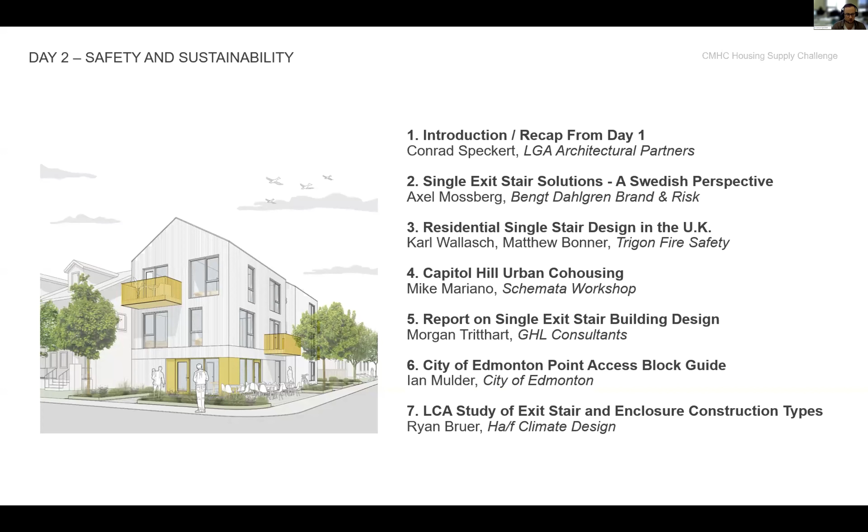We'll then turn to the Canadian context and hear from GHL consultants who have been working on a very detailed technical report on single-stair building design recommendations. We'll hear from Ian Mulder at the City of Edmonton, who will present the point access block guide that the city have developed. And lastly, we'll hear from Ryan Bruer of Ha/f Climate Design, which will touch on some key considerations in terms of embodied carbon and construction type for exit stairs.

Just to quickly recap for anyone who wasn't around yesterday, you heard from LGA and 3 other architects as we presented pilot projects and prototypes for single-stair housing across Canada. We looked at the cost benefit of single-stair design with 6 prototypes for infill housing, in terms of floor area efficiency, construction cost, net operating income, and residual land value.

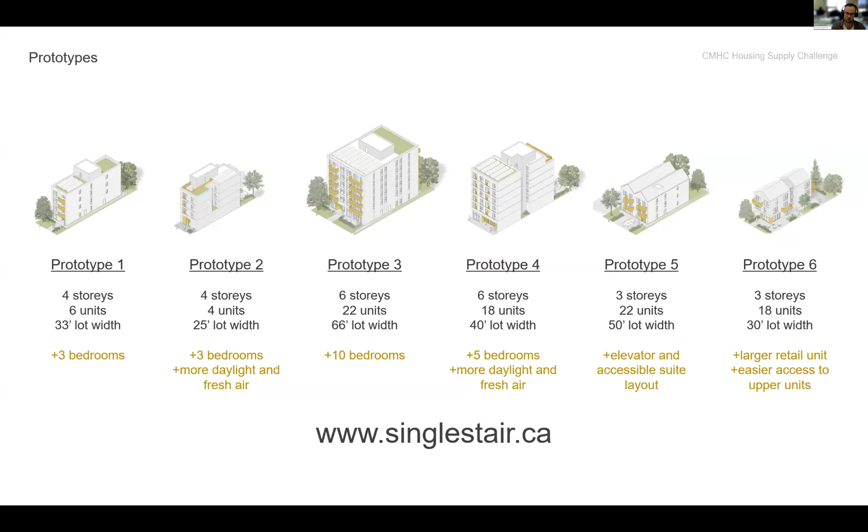There's been a lot of changes recently to zoning regulations and planning policy across Canada to allow for more housing in existing neighborhoods, really as an alternative to suburban sprawl. However, this type of what we might call gentle density, buildings like multiplexes of up to 4 units or small apartment buildings of up to 6 stories, are challenging to build on small lots.

The goal of single-stair design is really threefold. Firstly, it is to make these missing middle and small mid-rise housing types easier to build. Second, to make the development of smaller sites more viable. And that really leads to third, which is to enable small scale, what we might call citizen developers, types of organizations without the large amounts of capital required for land assembly or to acquire larger properties.

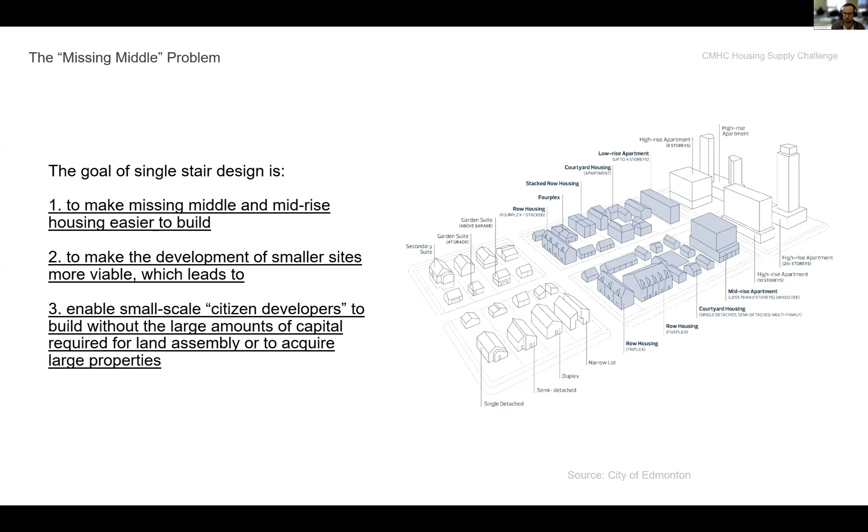Just to quickly talk about the prescriptive code, the National Building Code under Section 3421 and 998 says that any floor area in a building of not more than 2 stories in height is permitted to be served by one exit, with a total occupant load served of not more than 60. In other words, any multi-unit residential building, except for a stacked townhouse, of more than 2 stories is required to have 2 separate exits.

This diagram shows the maximum height for single-stair multi-unit residential buildings in jurisdictions around the world. As we work our way down the drawing, you'll see a clustering of countries around the 6 to 8 story height range, which corresponds to the height at which additional high-rise measures are required in the Canadian context.

LGA and David Hine Engineering submitted 2 code change requests to the National Building Code to allow single egress for buildings of up to 3 and 6 stories in height. It is our understanding that this is at least a priority topic for the 2025 to 2030 code cycle.

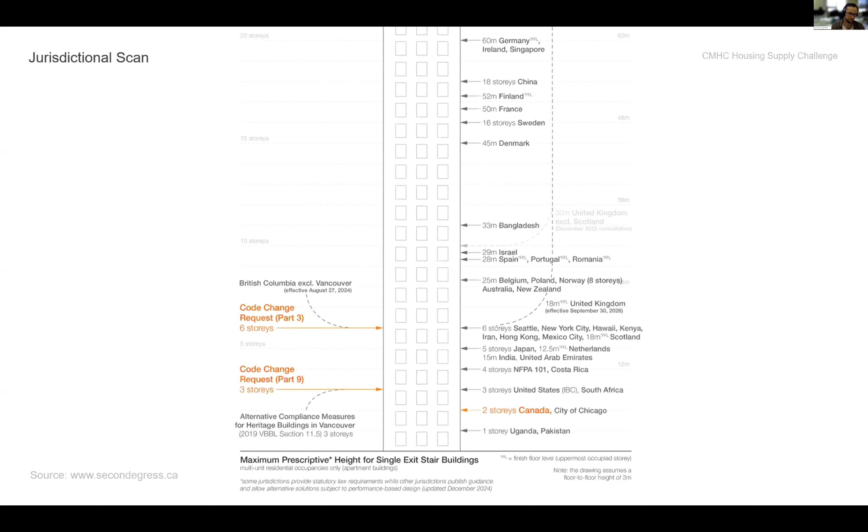Since the first edition of the National Building Code of Canada was written in 1941, the NBC has contained the prescriptive model code requirements for the design of buildings in Canada. In 2005, the NBC was transitioned to what we call an objective-based code, which introduced objectives and functional statements to clarify the goals of the NBC's prescriptive requirements and what they're intended to achieve.

This is one option of code compliance, since acceptable solutions by default meet the intended objectives of the code. The other option is the use of alternative solutions, which must achieve at least the same level of performance related to the objectives assigned to the associated provisions.

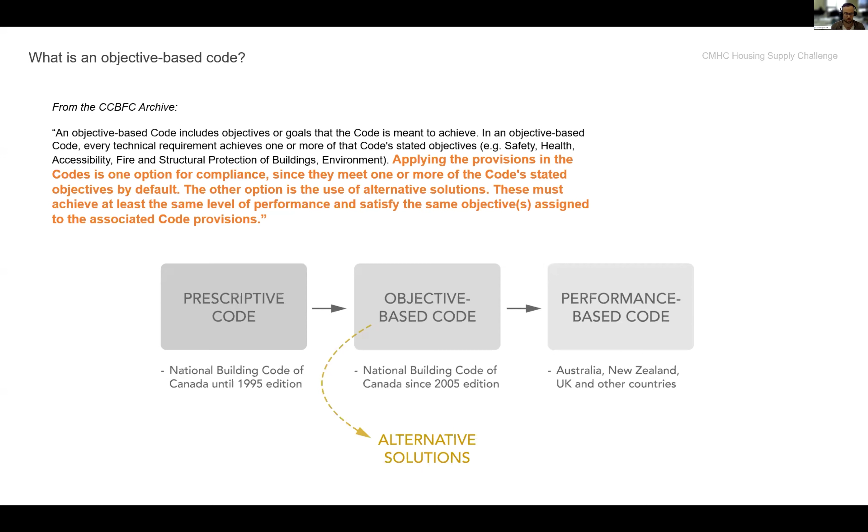I'll just note as well that single stair in Canada is not a new idea. In 1984, 2 architects wrote a research report for CMHC to document the differences in apartment building layout in terms of fire safety. In the 1990s, a very well-known architect wrote 2 papers on the challenge in building Main Street's housing.

Particularly in terms of the 2 exit stair requirement and parking requirements. Then in 1995, the former assistant director of the Ontario Building Code had written a study proposing single stair changes to the Ontario Building Code. So today, 40 years later, this technical issue is receiving a lot more attention given recent planning policy reforms.

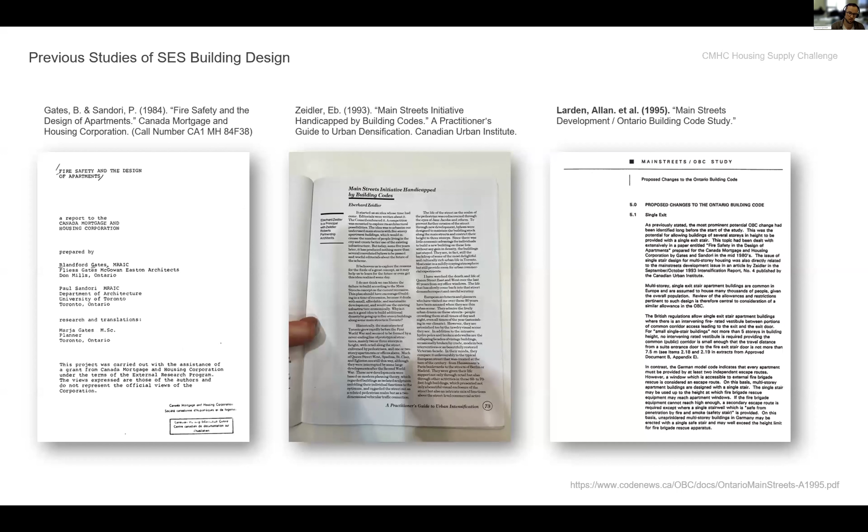The United States revised their limit on single stair about 20 years ago in recognition particularly of sprinkler system performance and reliability. So it is in many ways long overdue to discuss alternative solutions to address this issue in Canada.

Last year, the NFPA, the National Fire Protection Association, also held a symposium to discuss single exit stair and to hear from stakeholders, particularly in fire services across North America. The report included a comparison of fire statistics between building types.

According to the NFPA data, single detached houses are statistically the most dangerous type of housing, with a death rate of 25 persons per million. On the other hand, apartment buildings of 3 to 6 stories have a death rate that is 80% lower.

I mention this because many parts of the building code make it very easy to build houses, while adding many costs and complexities to the construction of small apartment buildings. Now, as Canadian cities look to change land use policies and zoning bylaws, we will inherently increase the fire safety of Canadians by providing more housing options that are in sprinklered and fire alarm buildings.

We will also be decreasing our per capita carbon emissions by eliminating further suburban sprawl and urban boundary expansion. And with that, I'm going to turn it over to Axel Mossberg to talk a bit about a Swedish perspective.

Right, let's see if I can share my screen. Let's go. There we go. There we go. Hello, everyone.

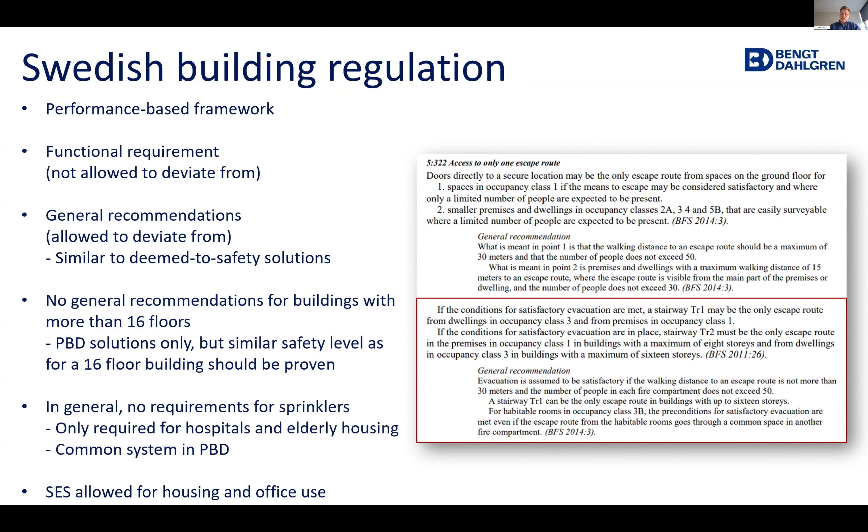So I'm just going to flip through some standard cases here in Sweden. This is a 2 to 3 story building. Here you're allowed to have one exit, and it doesn't have to be fire compartmentized. This is just a regular house, pretty much, or houses built together, and you're allowed to jump from your window up to 5 meters above the ground. So it's a self-evacuation strategy, pretty much, so the rescue service are not intended to be part of the evacuation strategy here.

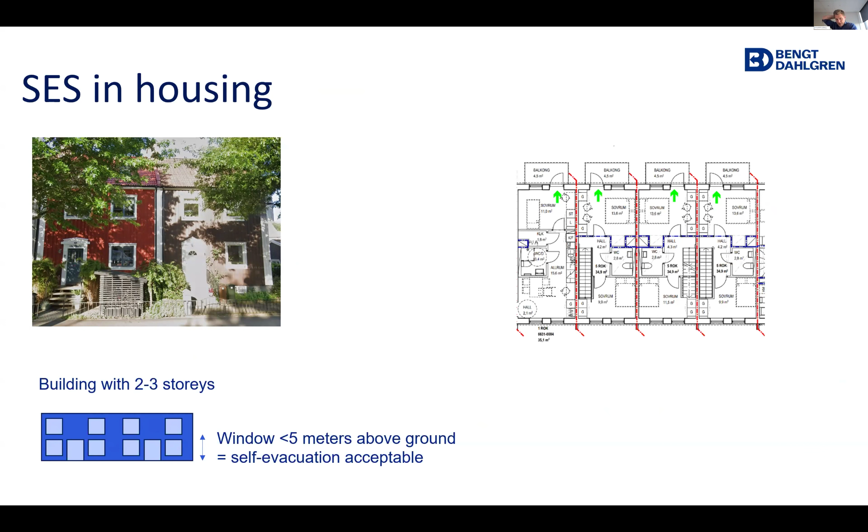If you go above that, with a building up to 16 stories, which this is also an apartment building, you are allowed to have a single exit stair if you do it as a TR2 stair, as we call it in Sweden, or TR2 trappa in Swedish. The difference between a regular stair and a TR2 stair is that you have a smoke vestibule in between, so here there's a fire compartment between the apartments and the stair.

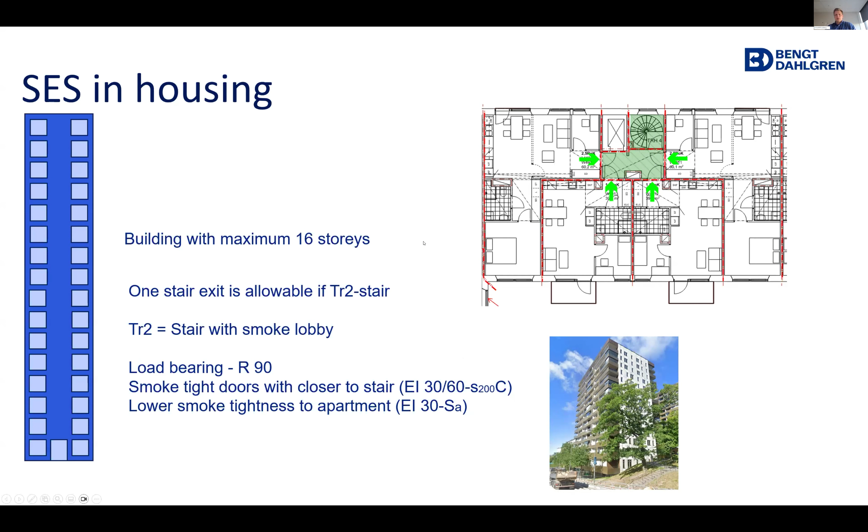For buildings above 16 stories, as I mentioned, we do not have a general recommendation, it's performance-based design. But based on experience, I can tell you we have a lot of 16-plus story apartment buildings with one single exit stair. You then have to have a TR1 stair, or TR1-trappa as we say in Swedish. The TR1 stair is pretty much a smoke lobby with a pressurization system of the stairwell.

So you pressurize the stair and remove the exhaust air, pretty much, often using the elevator shaft. You have to use performance-based design, as I mentioned. Just talking from experience, this will be different for each project, but for up to around 20 to 22 floors, it's very common to do this without sprinklers. The performance-based design will then compare the different stair solutions, pretty much. And when you go above about 22 floors, you generally put in sprinklers to make the risk analysis come together, pretty much.

It's the same load bearing requirement. You still have the smoke tightness requirement on the doors to the stair. It has to be a closer to the stair. It's also closers on the doors towards the smoke lobby, but in this case there's no closer on the doors towards the separate smoke vestibules here.

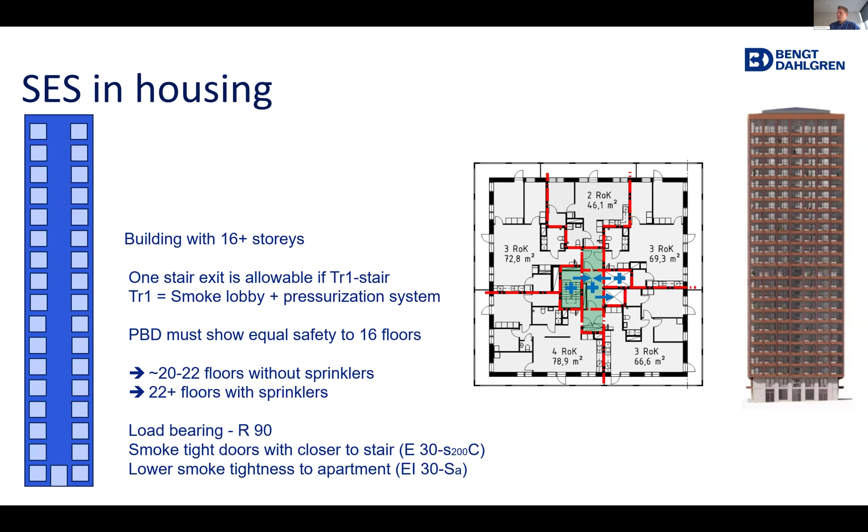Requirements. Also, I thought I'd give you a few examples. I've mostly been talking about apartment buildings, and we have Sweden's second largest or tallest building, an apartment building called Turning Torso. It was built in 2005.

And it was just passed by Karlatornet here in Gothenburg last year in tallness. It's 52 stories, 190 meters high. It's a residential building, it has sprinklers and stuff. It's a performance-based design, but it's also a single stair building.

And then I'll give you this as another example on the right. It's Kista Science Tower, an office building in Sweden, which is 32 stories and 124 meters high. It's an office building, also a single stair building, also performed with performance-based design.

But it's similar, just to give an example on office buildings as well. I currently have a few projects ranging from 20 to 27 floors with mixed different types, some residential projects and some office projects, with these single exit stair solution buildings.

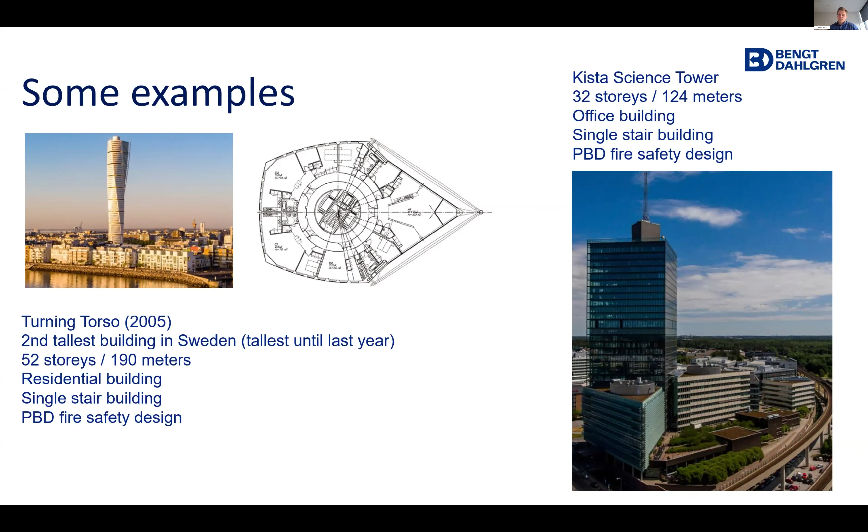So, also just a finishing note here is that the Swedish requirements for fire compartmentation is in general EI60, a 60 minutes standard fire resistance. Also, it should be noted that the facade requirement is that they should be non-combustible, at least for buildings with 3 or more floors.

Or pass a national test called SP Fire 105, which is a full-scale fire test, as you can see in a picture of it here. You build pretty much 3 stories of your facade, and then you can't have a fire spread above the second window, pretty much, or below the second window.

Generally, it should be noted also that we have quite a high level of quality in buildings, I would say, just looking when I've been around internationally, especially when we're talking about tightness of buildings. In Sweden, it's a cold country. I guess Canada is the same, but we are quite good at tightness in our buildings, pretty much.

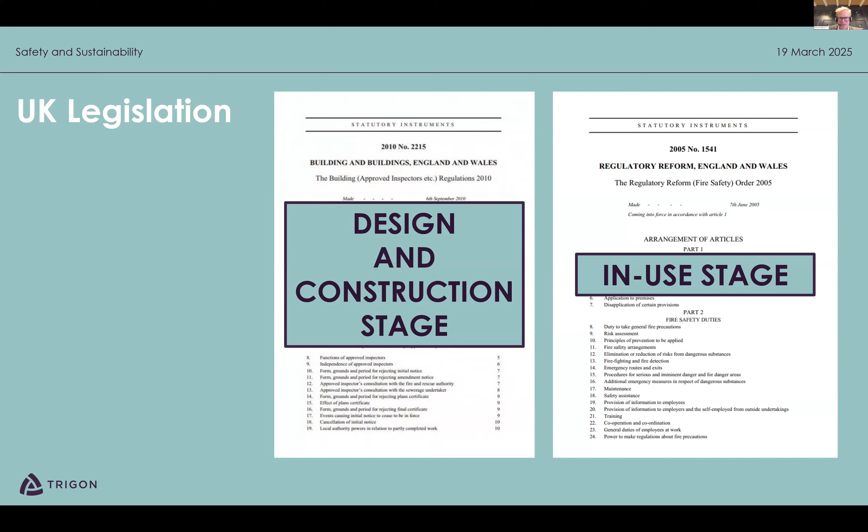And when you're a fire safety engineer, similar to other countries, there are a few areas you need to consider, and the building regulations are telling us to focus on. Focus is generally on life safety, and we do have to consider the means of escape.

How do we get people out, but also how do we get fire brigade safely in? Then we need to consider the materials to prevent internal fire spread, structural resistance, but also external fire spread, and access and facilities for the fire service.

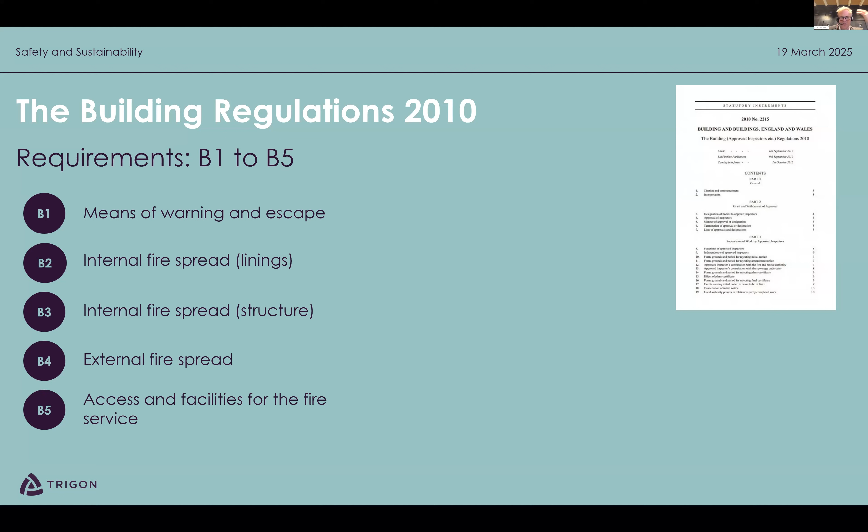What's now so special about these building regulations? Well, similar to Sweden, they are functional in nature. So what does this mean? The building regulations won't tell any designer how many stairs a building needs, or how many exits, or how wide stairs need to be, etc. But they give us a functional performance that is expected the building will achieve.

Because we're talking about single stairs today, I brought you just a text from a means of escape. As a designer, you have to design and construct this building with appropriate provision to achieve an appropriate means of escape, allowing people to leave the building to a place of safety. Appropriate. Wow. What does this mean? Can you imagine I would tell an architect, just design it appropriately. You don't need me.

Well, that's not really helpful. Our regulator knows this. So whilst we have to comply with the building regulations, there's no nice to comply with them or not. No, you must comply with them. You must comply with the functional requirements. The regulator has given us different compliance routes, different guidance documents that we can apply, deemed to satisfy, I think, were the words that Axel used.

The most standard route to achieve compliance with the building regulations is considered to be the approved document B. B, because it deals with fire safety. There are other approved documents that deal with other things designers have to consider. Today, we just focus on approved document B. And it's a standard document. We'll talk about this in a bit more detail.

When I started in 2006 for single stair residential, well, there was no limit. It was just giving us guidance how to design a single stair building, but it was not restricting the height.

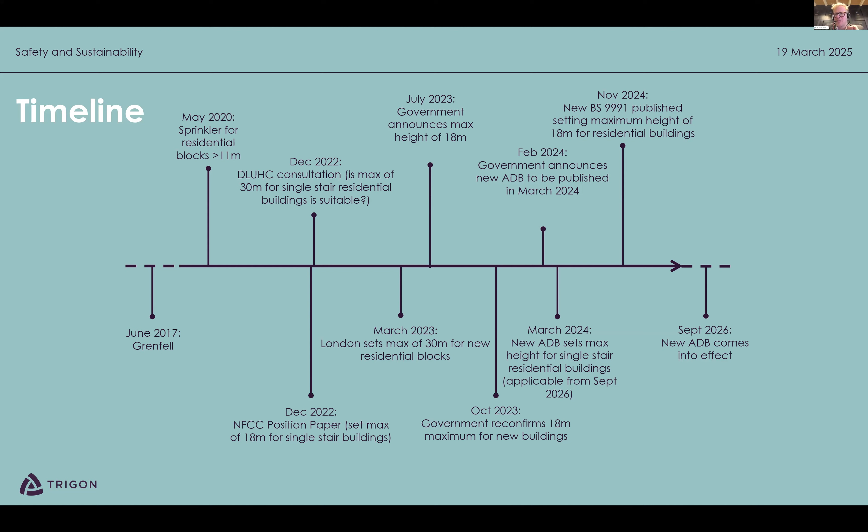So where does this leave us in the industry? I mentioned Approved Document B already. Currently, we could still design single-stair buildings without any height restriction because it only comes into effect in about a year's time. We already have built single-stair residential blocks of flats, not just over 50 or 100 meters, but over 200 meters. I think one of the tallest is 240 meters.

But of course, we know ADB is changing. The appetite is changing, and no one, as I'm aware, is building single-stair buildings at the moment. What will they look like in the future? Single-stair residential buildings will be up to 18 meters height.

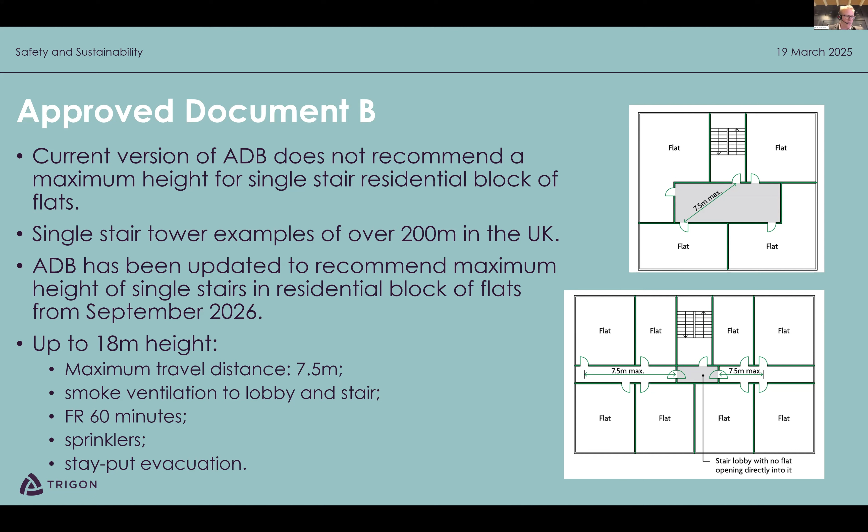You can see in these diagrams they restrict travel distance to 7.5 meters in a single direction. They expect the stair to be ventilated, the lobby in front of the stair to be ventilated, general compartmentation of 60 minutes between flats, and sprinklers throughout if you're over 11 meters. They are based on a stay-put policy, which means only those in the flat where the fire occurs will be asked to evacuate. That's ADB.

Now let's look at the second route, the risk-based approach, BS 9991. There was a version from 2015, and suddenly in November 2024 it was updated, and everybody was surprised, or not, but it did restrict, with immediate effect from the end of November 2024, the use of single-stair buildings in residential use over 18 meters. So there's the recommendation to have two stairs for taller buildings, but up to 18 meters you can still build with a single stair.

Similar to the thinking in ADB, we're looking at travel distance and dead ends of 7.5 meters. If you have sprinklers, you can double this up to 15, so a bit more flexibility. It looks at ventilation of the corridors and ventilation to the lobby in front of the stair. It's based on sprinklers and stay-put. It also talks much more in detail about evacuation lifts, because it's a huge discussion in the UK how we evacuate mobility-impaired persons.

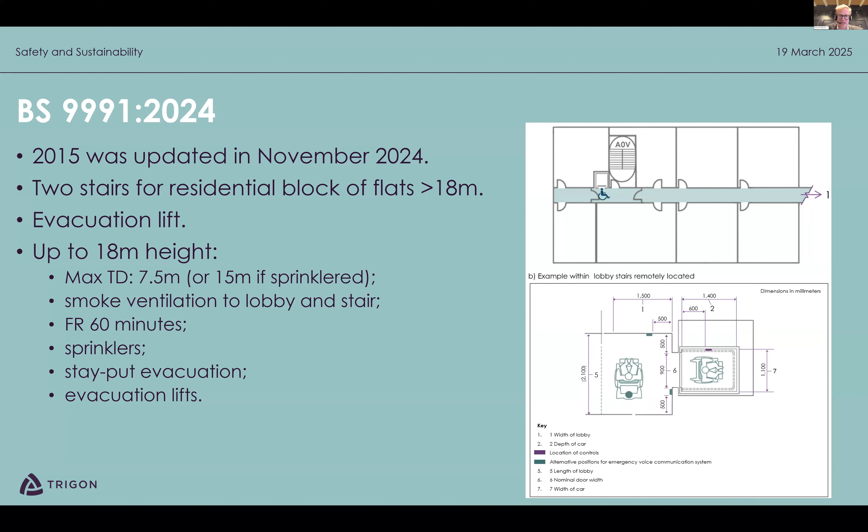I'll emphasize a bit on smoke ventilation, because we think in three different ventilation systems. The stair needs ventilation, often a vent on top that opens and provides a way for natural air in. The lobby in front of the stair needs pretty much the same ventilation as the stair, a natural shaft. Then the corridors, which have direct access to the flat and where we expect smoke in the first instance spreading from the flat into the corridor, should either have natural ventilation, or for taller buildings mechanical ventilation, or a pressurization system, as we've also seen in the Swedish slides, where you create a positive pressure to prevent smoke spread into certain areas.

A key area of these single-stair buildings has always been the ground floor: how do we get people really out from the stair, ideally directly to the outside, without letting them pass again through corridors, flats, or other risk areas?

So we come to the summary. Here in the UK, we have 12,500 residential buildings that we call higher risk because they're over 18 meters. They've been built since the 60s. We have them, and we know quite a lot have a single stair, and some are over 200 meters.

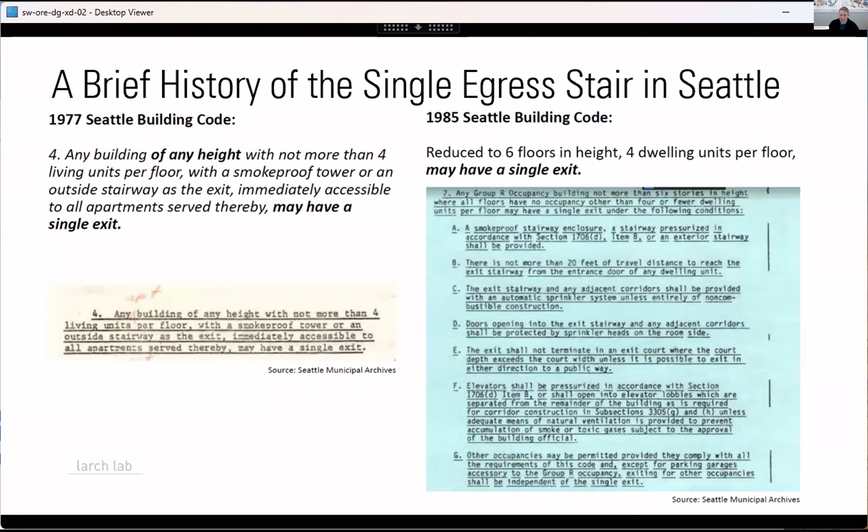A brief history of the single egress stair in Seattle. In 1977, a building of any height, with not more than 4 units per floor, could have a single means of egress, a single stair. In '85, it was reduced from any height to 6 floors in height, still no more than 4 dwelling units per floor. Current code allows up to 6 stories of residential R2 occupancy, no more than 4 dwelling units per floor. We had some state legislation that came before our local agency last week and was passed, and will be enforced at the state level, available to everyone at the state level as of July 2026.

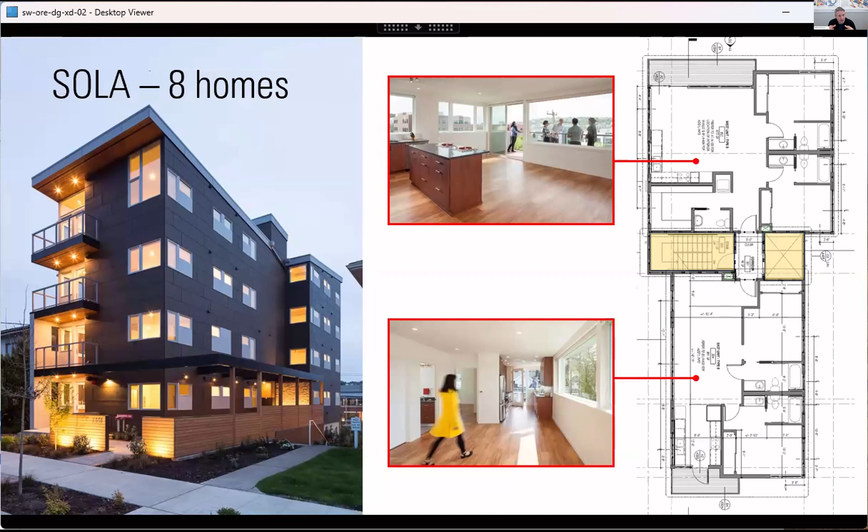Our office has done a few single means of egress stairs, including this one, Sola, which has 8 homes. The image on the right, the floor plan, shows the single stair, with the elevator opening onto it. This is for a developer that really wanted a high efficiency factor for each of the floor plans, so there's no community area associated with that. It meets the intent of the code really at a bare minimum.

So what I'm going to talk about for the remainder of my few minutes is a project we call Capitol Hill Urban Co-housing, approximately located where the red circle is on this image. You can see the Seattle skyline in the distance; we're walking distance to the city center. The Capitol Hill neighborhood was in the news internationally a few years ago for the Capitol Hill Occupied Protest Zone, which is essentially just to the left of the red circle. This is ground zero for protests occurring in the East Precinct, just on the left of the image. We have a light rail station just to the right of the park in the image as well.

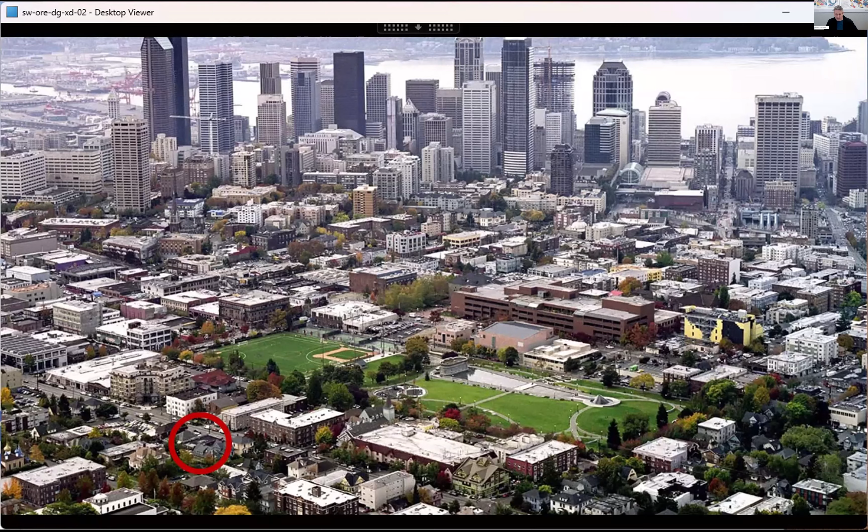An aerial view of our project. This is essentially a 5-story building. We are similar to the one on the left—actually we're the yellow and light gray one on the right. The one on the left was built a couple years prior to ours under the exact same zoning restrictions for height and setbacks off the power lines, with a similar tight construction cost budget that we're trying to hit. So they ended up looking kind of similar, but there's actually 32 units in the building on the left, 4 stair towers, no elevator, and up to 4 units per floor.

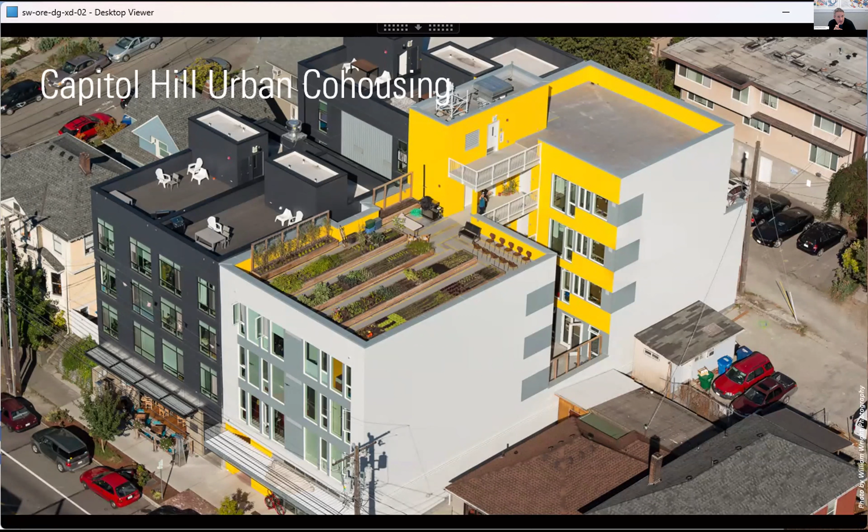Our building, the one on the right, is 9 homes surrounding a courtyard space, with a single egress stair and elevator.

You can see the damper at the top of the elevator hoistway. We actually saved some money by not taking the elevator all the way up to this upper roof level, but there is a smoke and fire damper for a naturally ventilated elevator hoistway there.

There is a stair pressurization fan just on the upper right here that pressurizes the stairs. Each of those egress balconies provides access to anywhere from 1 to 3 units per floor, no greater than a 6-meter distance from the front door to that doorway.

Beyond the building, the single egress stair in our case allowed us to do an economical building that we could get 9 families together and develop on our own.

This idea of co-housing is something that originated in Denmark and was brought to the US somewhat recently, a few decades ago. This idea of kind of living in a community, intentionally knowing your neighbors. We actually got this group together before we had a building.

There's a deep focus on community and privacy, the ability to live together but have your own home, so you can walk out your door and find a community and activity, but being able to retreat to your home as you would anywhere else. I call it a very comprehensive approach to resilience, the idea of knowing your neighbors, and those are the most resilient communities that we can build.

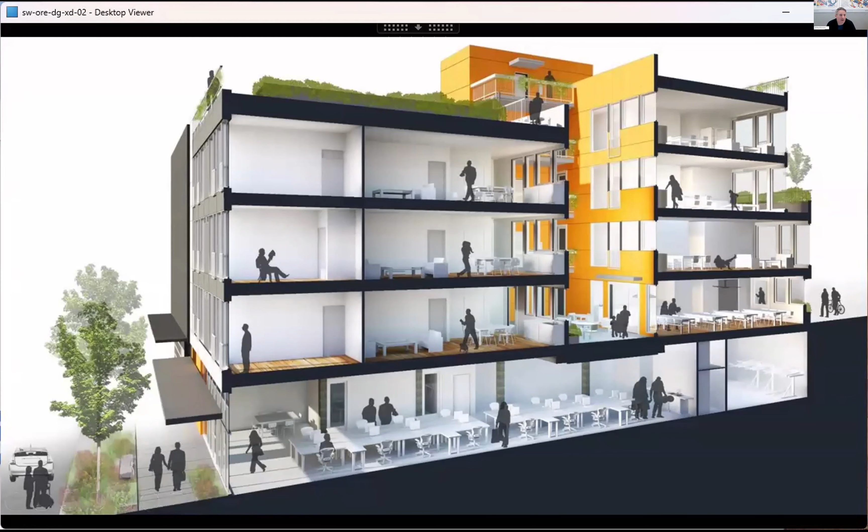That single egress stair and the elevator and those balconies open to a very compact courtyard space that's about 5.5 meters by 6 meters in distance. The balconies add a little more space to that, but it's essentially what we call kind of the heart and soul of the community.

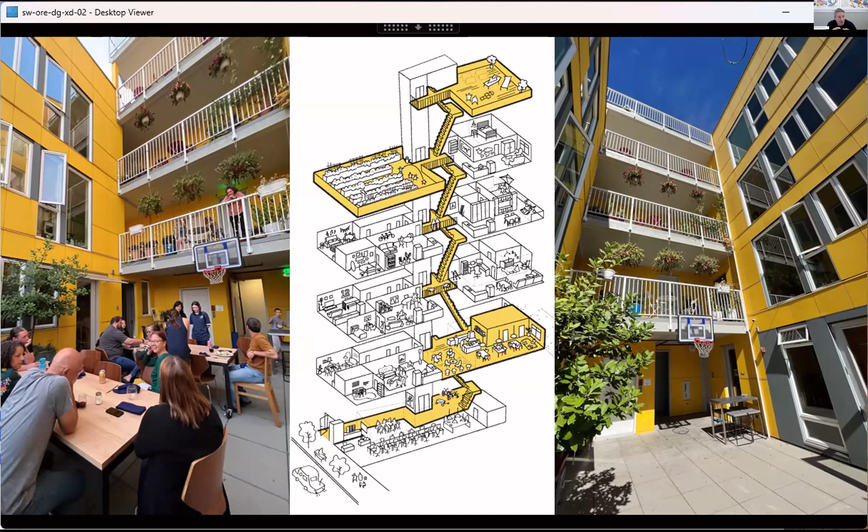All the homes are whatever you can think of might be a home, but it's that common area, that circulation space, in the diagram in the middle, we've drawn in yellow. So it's that common area that connects us all together socially, activities that take place around that courtyard space and that single egress stair.

Typical floor plan here, 2 units on the left. In yellow is the elevator and the stair and that egress balcony. Again, no more than 6 meters of distance from one of the unit entry doors to the stairwell door. Doors are rated, on closers. The stair is pressurized. The balcony is open.

We used a planning approach that we came across in Denmark too, that essentially created kind of semi-public areas of the home at that front door and kind of going deeper into the building for more private areas.

An example of one of those homes, looking east away from that courtyard space and out to the private balcony in the home, looking the other direction towards that courtyard space.

For those who have seen the TED Talk that my partner gave on living in community, this is one of the still images from that. Spencer is actually in his window, about a 6 meter distance from where I stand. The image on the right shows our front door and those egress balconies, the elevator, and the stairs are right over there as well.

One of the advantages of that open space, I can open my front door and periodically come across activity occurring out in that space. Rather than a double loaded corridor and multiple stairs serving a distributed social function throughout the building, we've concentrated all of this activity into a fairly dense little space that allows access to that stair and the elevator and overlooking that courtyard space.

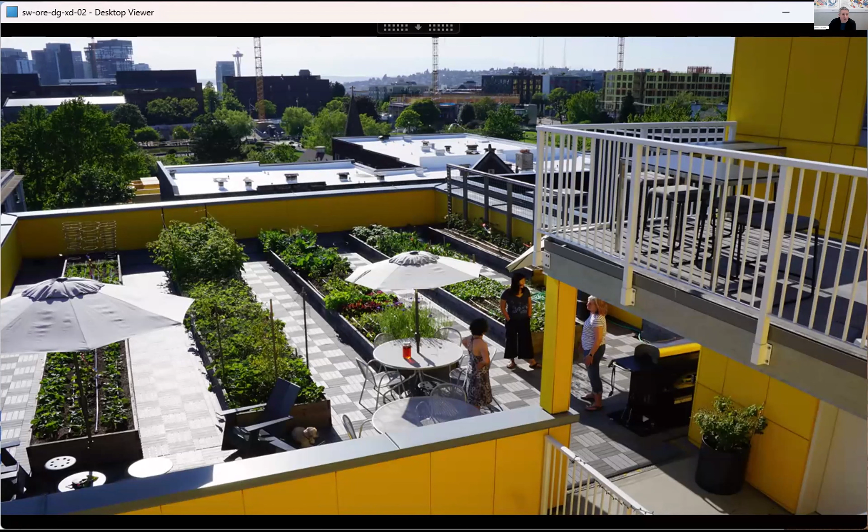The courtyard is in the foreground. The elevator is off to the right here. Those egress balconies you can see. We've got a rooftop farm up there that looks out to the west. The occupant load up here was designed to be about 10, so the beds actually consume a fair amount of that space specifically to keep the occupant load down.

Looking down into that courtyard, throughout the year there's a tremendous amount of activity that takes place. That concentration is allowed by having that single egress stair and the concentration of activity in the community. My partner and I are constantly taking photos down because it's just an interesting reminder of the liveliness of community and living intentionally there.

Something that came up yesterday in conversation was the ability to provide bike maintenance rooms in the building. The middle image here is me rationalizing the investment I've made in a lot of bicycle tools and maintenance equipment, offering a twice-a-year bike tune-up day for the community. Again, this multi-purpose space at the heart and soul of the community serves a variety of functions - celebrations, watching the weather - kind of between and outside the homes.

So that's an overview of what a compact building developed intentionally for community can look like. It's just one example. We had a tight construction budget and a lot of constraints we were dealing with, but we're excited about the outcome. Thank you again to Conrad and everyone who put on this conversation today, and I'm looking forward to questions. I'm going to hand it off to Morgan next.

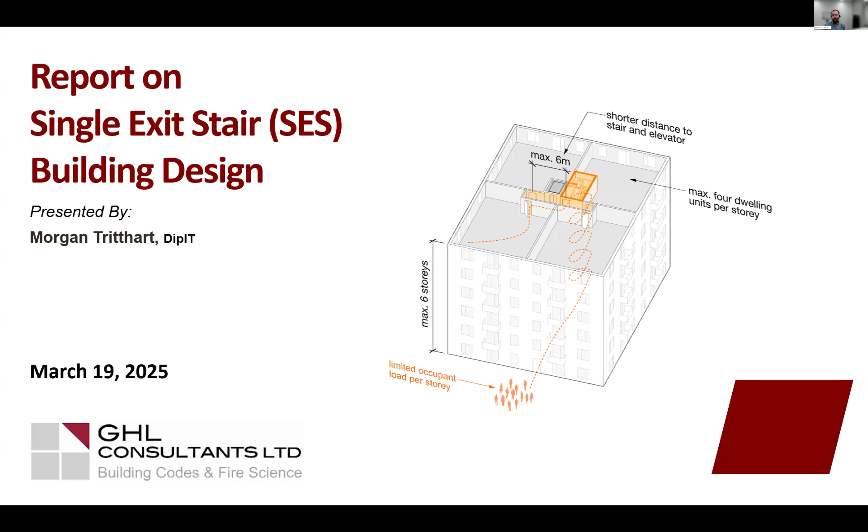My firm here, GHL Consultants, wrote a report on single exit stair building design in the Canadian context. I'm going to run through the high-level overview of it. Let me just get that out of the way here.

Okay, so GHL, who are we? We're a firm of engineers, architects, and technologists founded in 1992, based out of Vancouver, BC. We're a building code consulting firm first and foremost, so we help engineers, architects, and developers interpret and apply the building code, including alternative solutions. If you haven't heard of us, you've probably felt our effects throughout the Canadian building industry. We were an advisory consultant on the 6-story wood frame code change, and Tallwood House at UBC is one of our major milestone projects - the 18-story mass timber building.

Our report was written for round 4 of the CMHC Housing Supply Challenge. In it, we provide recommendations for residential buildings up to 6 stories in building height that are served by a single exit stair. We make recommendations in both Part 3 and Part 9 of the code, going a lot more in depth into Part 3 than Part 9.

So this report is a public document. I believe it has been published now, and the intention is that this report is used as a resource for professionals to develop alternative solutions for single exit stair buildings in Canada.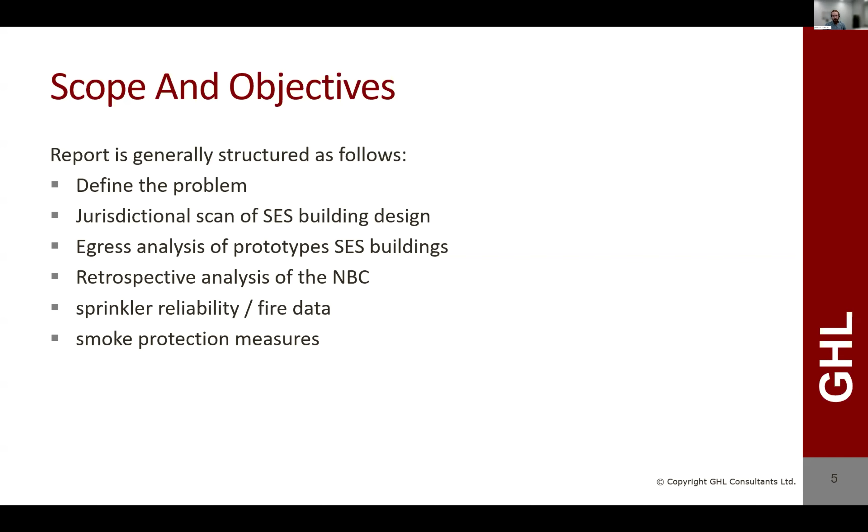And then we add some discussion around smoke protection measures of a single exit stair. With the National Building Code, the first thing you have to do with anything in the building code is read what it says. So this whole thing is based around sentence 3.4.2.1, which prescribes 2 exit stairs, but it says sentences 2 to 4 are when you're allowed to have a single exit stair condition in Canada.

Sentences 2 to 4 are very important for when you're writing any sort of alternative solution to this, because they will shape the discussion around the thought process of the NBC when it permits the inclusion of a single exit stair condition within a building.

So what it does, you have to consider the level of risk in the acceptable solutions, how they're mitigated, and what is considered acceptable for when the building code allows you to have a single exit stair condition. Those answers lie within the intent statements of sentences 2 to 4, which say: limit the floor area, limit the occupant load, limit the travel distance, make sure that when you're discharging, you're not discharging one story up of the building, and that there's occupant familiarity.

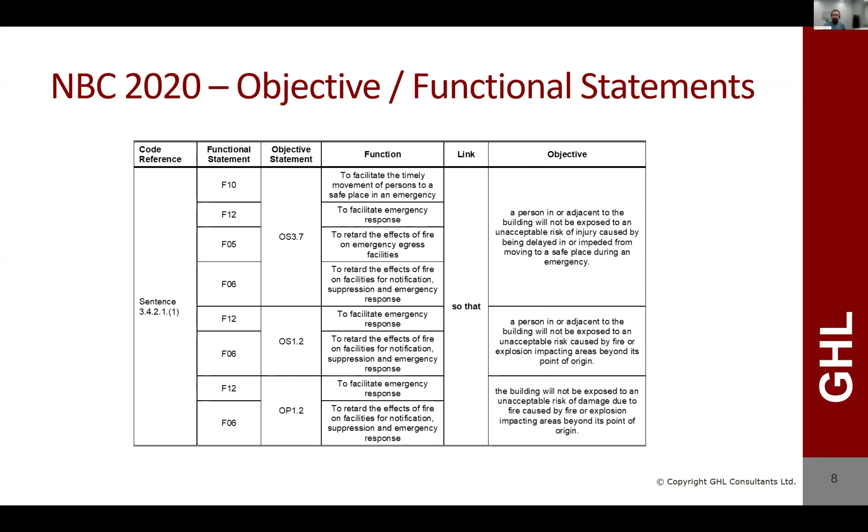So we thought it would be very important to talk about the intent statements, and we talk about them in the report. The objective and functional statements for sentence 3.4.2.1.1, which is the sentence you would be writing any alternative solution to, has 4 functional statements tied to 3 objective statements. I'm not going to go through all of them, but to bring it back, it's about the objective and functional statements attributed to the applicable acceptable solutions.

So that brings it all the way around to our opinion: that you can take the performance of a single exit stair building with additional measures and compare that to a 2 exit stair building under Division B, and it would perform as well as that building.

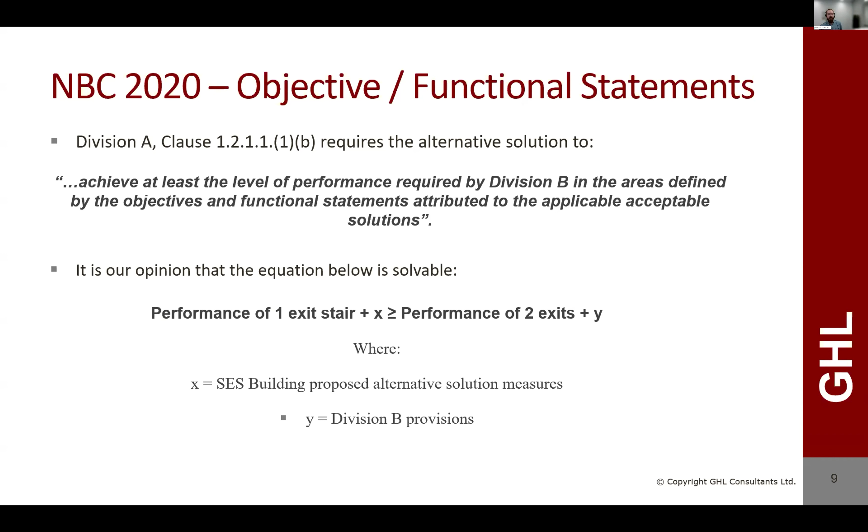Next part of the report, we go into a discussion on risk and risk analyses. We're recommending, if you're doing an alternative solution, that some sort of risk analysis is provided just to help quantify the level of performance of the solution you're proposing. Quality of data is really key, so acquiring that is, I think, paramount to any discussion around that.

There are 2 guides in NFPA, 550 and 551, that could be helpful for this. We identified those 2 - it's not the only way to do it, but they give options here. 551 is likely the direction I'll be taking whenever I produce an alternative solution for this.

It's tough because it's hard to do a fully quantitative analysis - you need a lot of data to do so. So you can do a semi-quantitative analysis based on likelihood and consequence, and it allows you to control for variables and make a reasonable judgment at the end of it.

Next in the report, we go through a jurisdictional scan across different building codes that permit the single exit stair condition in residential buildings. There's a lot around the world that do that, but we shortlisted it to 7 different building codes: Seattle, New York City, England and Wales, Sweden, Finland, Australia, and New Zealand.

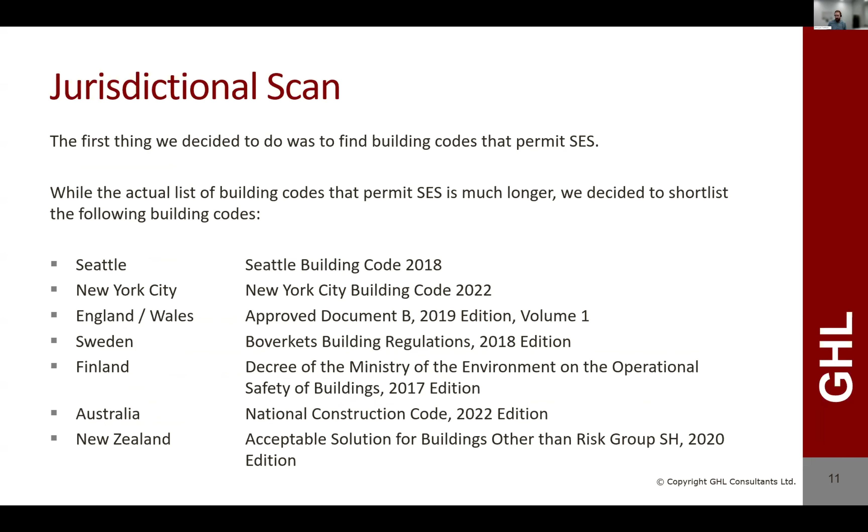So we took those building codes, analyzed them, and broke the provisions down into 4 overarching categories for general building provisions: egress, exiting, fire separations, and fire department provisions. From there, we break it down further into what construction type can you do, what's the maximum building area, what's the maximum building height that you can do in a single exit stair building, and do you require sprinklers, fire alarm, all that stuff?

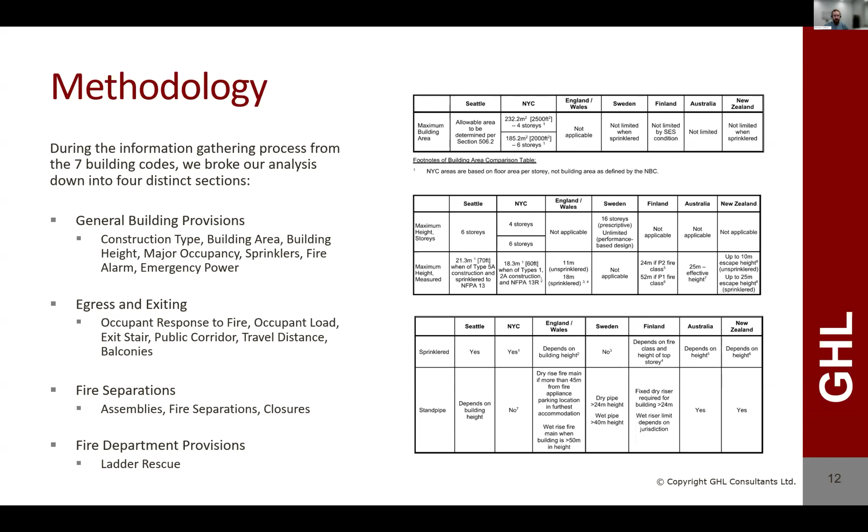And then from there, we take what we know in these other codes and try to translate that to a Canadian context, put that squarely within the building code that we use, and from there try and make a reasonable assumption as to how we can, as well as we can, address the objective and functional statements related to the single or the two exit stair requirement.

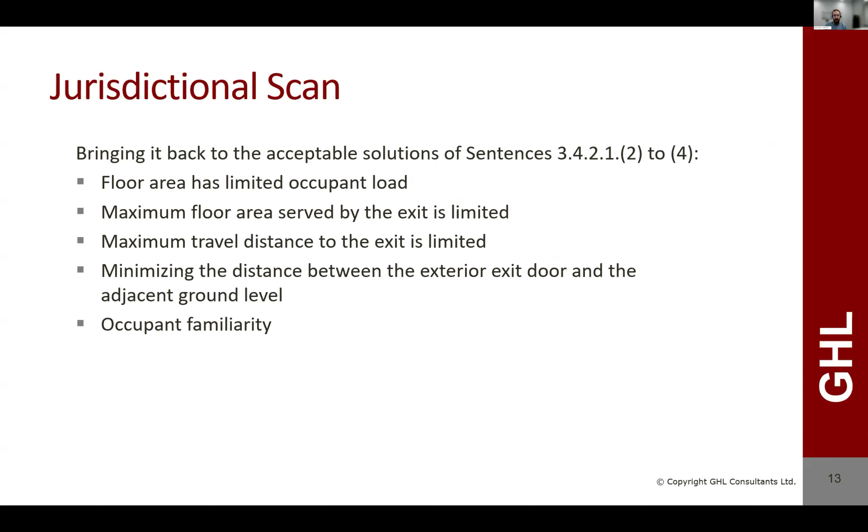So bringing it back around, like I was saying, what we have to do is try and limit the occupant load, limit the maximum floor area, limit the maximum travel distance, make sure that the exterior discharge is basically at ground level, and occupant familiarity.

So for something like occupant load, when we did an analysis, we would take the Division B solution of a 6-story wood frame building with 2 exits. There's no limit to the amount of dwelling units you can have on there - you're limited by the exit capacity of the 2 stairs, and it's generally about 275 people. That means you have 1,375 potential cumulative occupant load all the way down to level 1, where it discharges out.

Our suggested limits for single exit stair buildings is a maximum of 6 dwelling units per story, an occupant load of 30 persons, which would mean a 150-person cumulative occupant load on the 5 upper stories, and a maximum of 20 dwelling units served by the single exit stair.

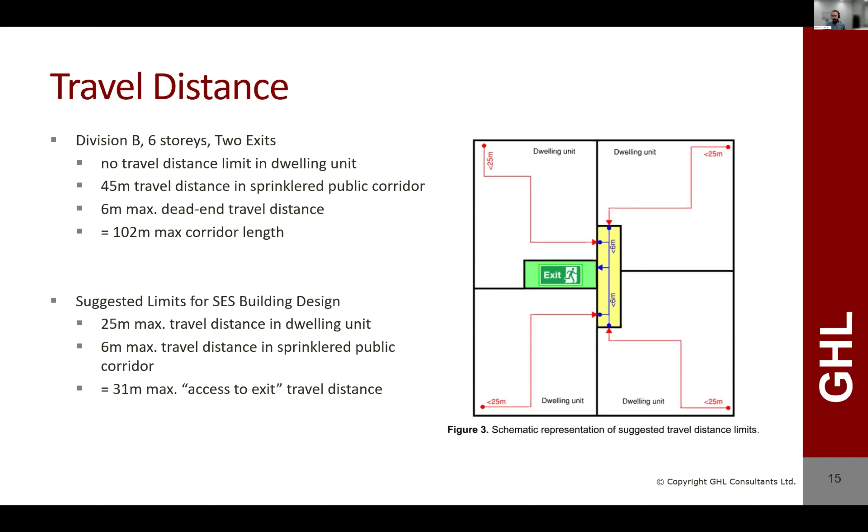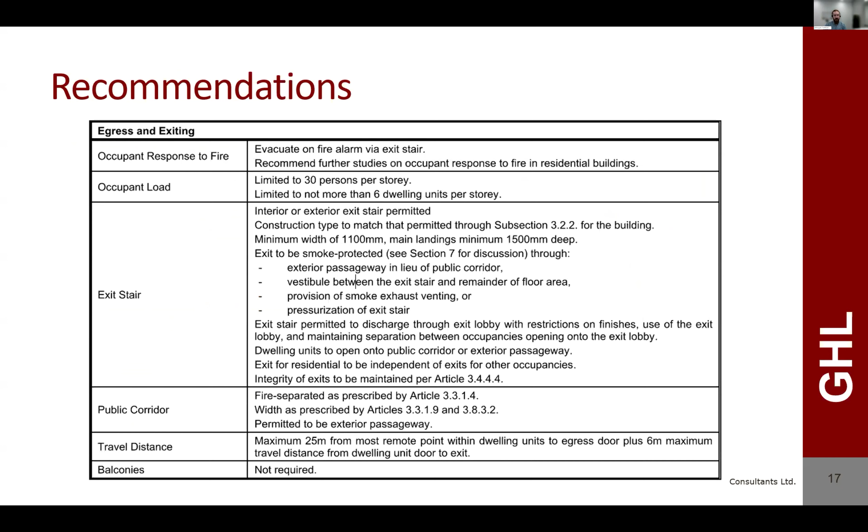Yeah, you bet. Okay, so we do the same thing for travel distance. We do a comparison between the Division B scenario and make a recommendation for the single exit stair building design. At the end of that section, we collate everything into general recommendations all the way through each overarching section and each subsection.

We do a Part 9 analysis where we do a comparative analysis between Division B and the SES building. It's based on the Part 3 analysis. It's nowhere near as in-depth, but essentially you're sprinklering the building and it makes it that much safer.

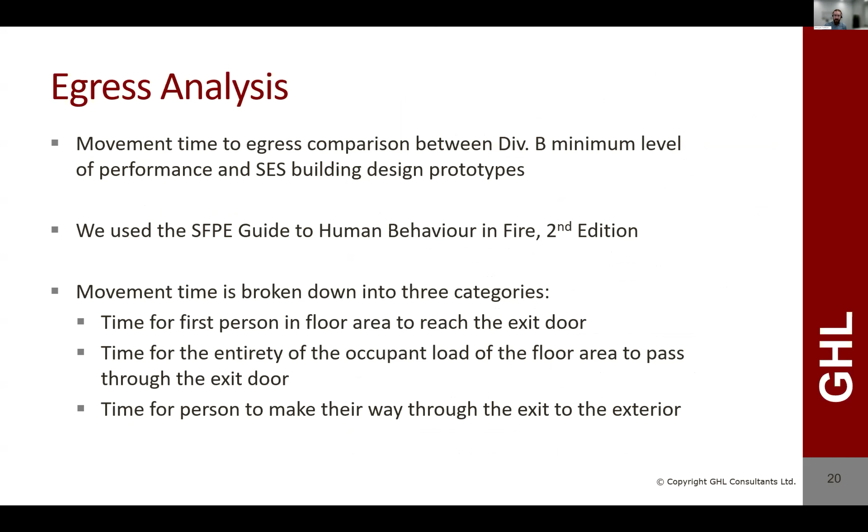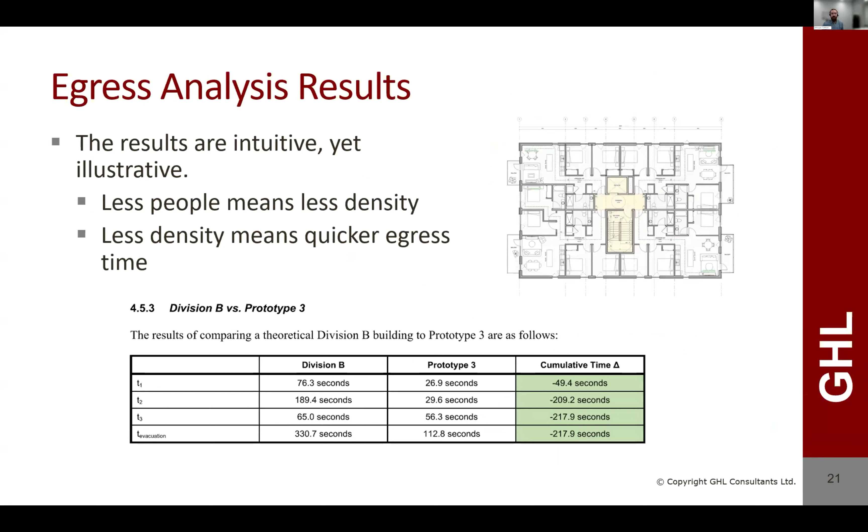So we go through an egress analysis using Conrad's or LGA's prototype design buildings. We do use the SFPE guide for human behavior in fire. The analysis, essentially, is as you would think it would be. You have less people, less density. Less density means quicker egress time.

We go through a retrospective analysis of the BCBC or the NBC provisions. We set it at NBC 1980 versus the modern NBC and compare the level of performance. Again, we're expecting that, or we found that, modern NBC would outperform the NBC 1980.

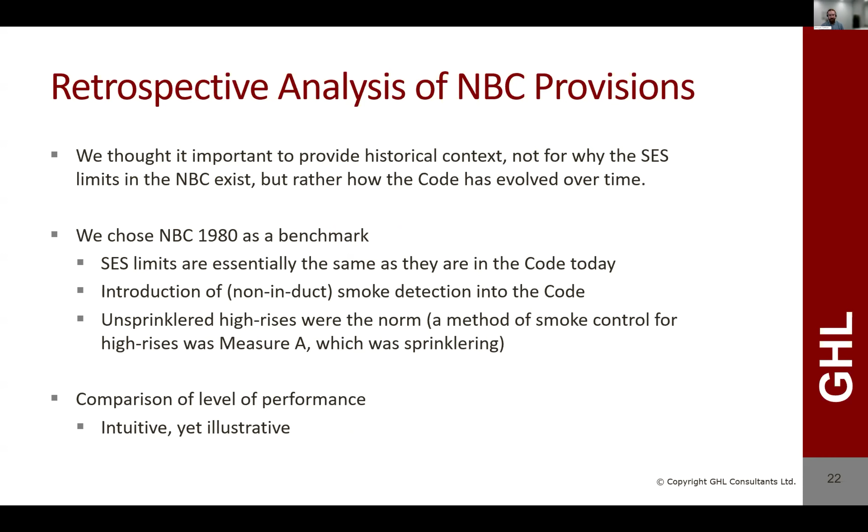So we think this is important because there are design innovations that became acceptable solutions, but were initially based on an alternative solution approach, which is one of these things. One of these things is the introduction of the 6-story wood frame building that used to be an alternative solution. Now it's code.

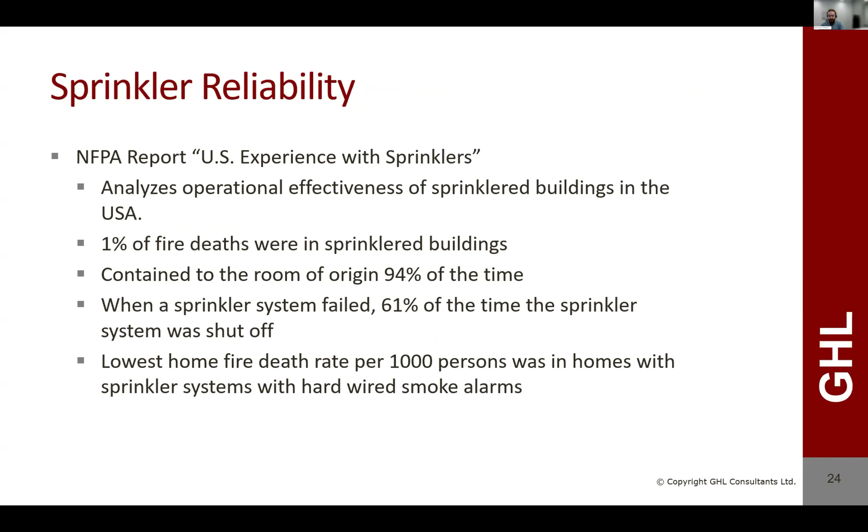We go through a sprinkler reliability analysis, and we use the NFPA report, U.S. experience with sprinklers. It's fire data. Long and short of it is sprinklers and fire alarms in your building, and your death rate goes way down. Same thing with the BC Office of the Fire Commissioner annual report. Sprinkler your building, fire alarm, deaths go way down.

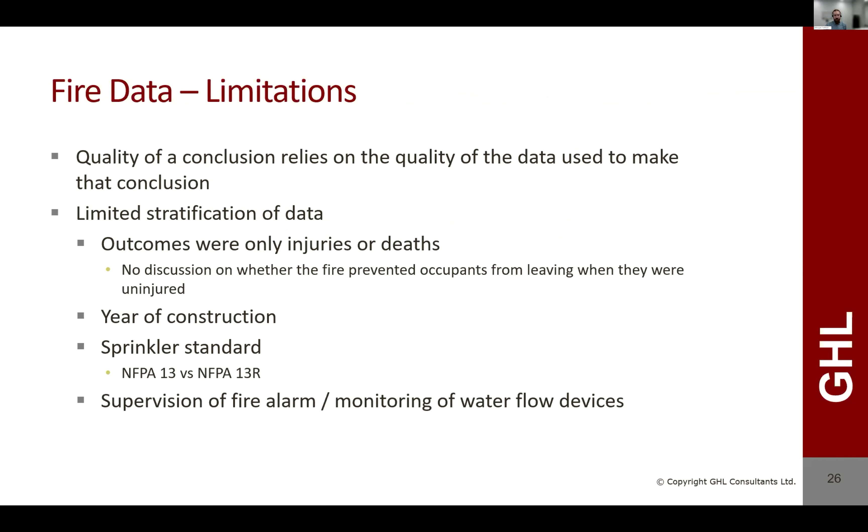There are limits with fire data, and we talk about that. It's related to outcomes. The outcome is only injury or death, and there's no discussion on if fire prevented the occupants from leaving. It doesn't stratify by year of construction, or the standard of sprinkler.

So we talk quickly in the report about smoke control in the single exit stair context. We don't prescribe smoke control in non-high-rise buildings, just because we expect the evacuation time to be low enough that smoke development will not affect that.

However, we do think that some sort of smoke protection of a single exit stair should be provided, and we came up with 4 potential means: an exterior passageway which accesses the stair, a vestibule between the single exit stair and the public corridor, the smoke exhaust or extraction method, or just pressurizing the single exit stair.

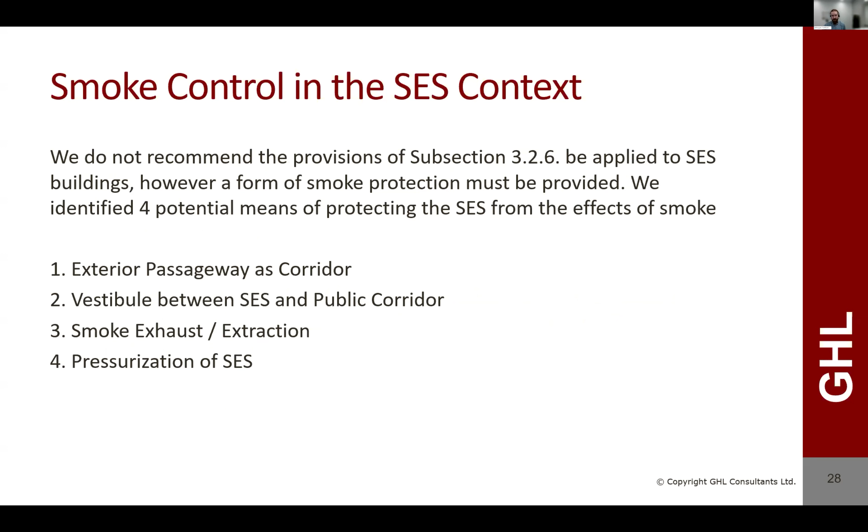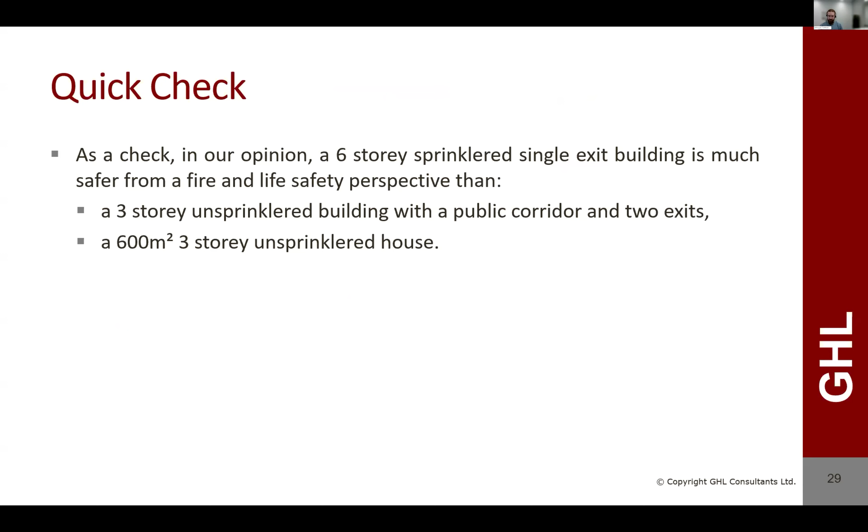So as a quick check, our opinion is that a 6-story sprinklered single exit building is much safer from a fire and life safety perspective than a 3-story unsprinklered building with a public corridor and 2 exits that's permitted to be designed through Division B, or a 600 square meter 3-story unsprinklered house, also designed and constructed through Division B.

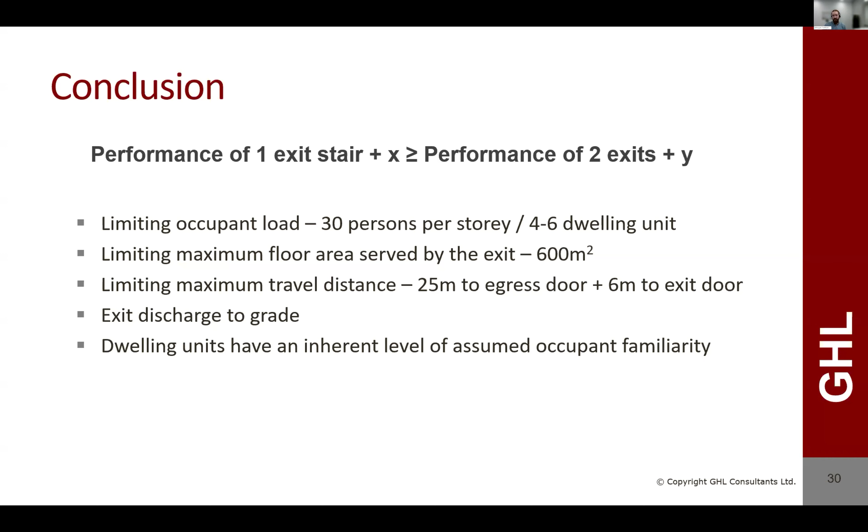So our conclusion at the end of the report is we believe that the performance of 1 exit stair plus some enhancements can perform as well as the performance of 2 exit stairs plus the regular Division B provisions. And we do that through limiting occupant load, limiting maximum floor area, limiting maximum travel distance, exit discharging to grade, and the dwelling units have an inherent level of assumed occupant familiarity with the building.

Other things that we would do to enhance: NFPA 13 sprinkler standard regardless of building height, smoke detectors in lieu of smoke alarms in dwelling units. That's a direct code compliant provision, but it allows it to be fire alarm devices, so you can see them on the panel. No 20-minute doors, so you have to have 45-minute FPR doors, requiring 2-layer construction at combustible floor assemblies and at the exit fire separations.

Increase of the stair landing width to 1,500 millimeters for counterflow. So if there are responding firefighters at the same time as people are evacuating, there is a place where there is counterflow. A smoke protection method, as I stated before, the single exit stair would serve residential only, and it would be independent of any other exiting in the building. And on top of all that, to wrap it all up, it'd be a risk analysis.

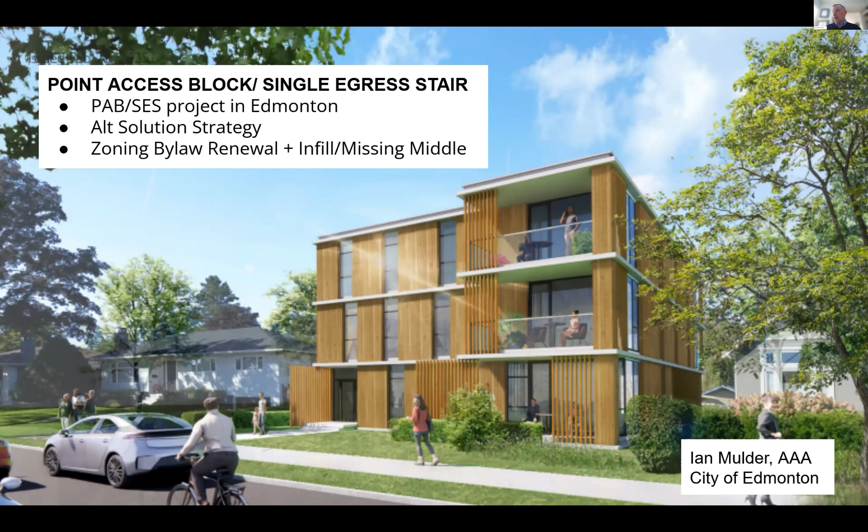A couple of things here: we call this the point access block guideline. I know there's other terminology, single egress - maybe one day we'll all come together on what the name is, but we've been calling it kind of both. We'll look at a little bit of how this came to be in Edmonton, and our particular alternative solution strategy, and how that really works for the city itself, and some of the unique qualities of the city, and some of the changes that we've made recently to zoning, especially with respect to infill and missing middle type housing.

So a little background: in 2023, Councillor Michael Janz had invited Michael Eliason to come to the city, and he did a couple of public presentations, one at the university and one for maybe a bit more city staff, a bit more inside staff requirements, and of course Conrad Speckert was there as well presenting, and this really opened, I think, the eyes of both citizens and also the professionals here on the opportunities with point access block type buildings, which frankly, I don't think was on a lot of people's radar at that time.

Obviously, it had been in Mr. Speckert's mind for quite a while, as it was the basis of his thesis and obviously the continuing work that has led us here today. So thank you very much, Conrad, for being such a champion of this type.

But that led to a lot of opportunity that we saw here in the city, and we were all pretty pumped. Ultimately, we saw this as an opportunity to increase diversity of housing type. There was a lot of discussion on perhaps the opportunities for developers to create lower cost housing and that kind of thing. We'll see how the market responds in time, but ultimately we see this really as a question of quality housing and more diversity.

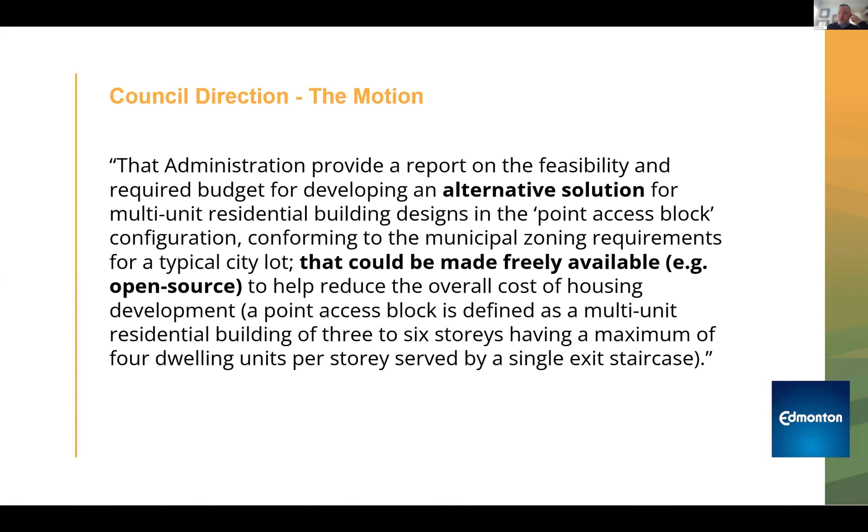So Councillor Janz put together a motion which essentially directed the administration, including my group, to start developing thoughts around this. And at the same time, of course, the CMHC Housing Supply Challenge was underway, and that enabled us to get some funding to pursue this work.

And the basis of our work, of course, was an alternative solution strategy and a general guideline. I'll speak a little bit more about what that guideline looks like and what the audience for it is. But ultimately, we've taken the approach, as has been alluded to by other folks here on the call, of essentially respecting the current code and providing the designers and owners with a basis for both understanding alternative solutions, because let's be honest, not that many builders operating, especially in the residential world, use these as a common strategy. It tends to be more common in Canada, especially for commercial buildings and that kind of thing. But on small scale residential, the hiring of specialty code consultants or fire protection engineers to support projects is a bit rarer. So there's an educational quality to our work.

And we ended up hiring Dub Architects, a well-known local firm here, who in turn hired LMDG code consultants out of Calgary to do the technical analysis. And this led to the guideline that was released in the last month.

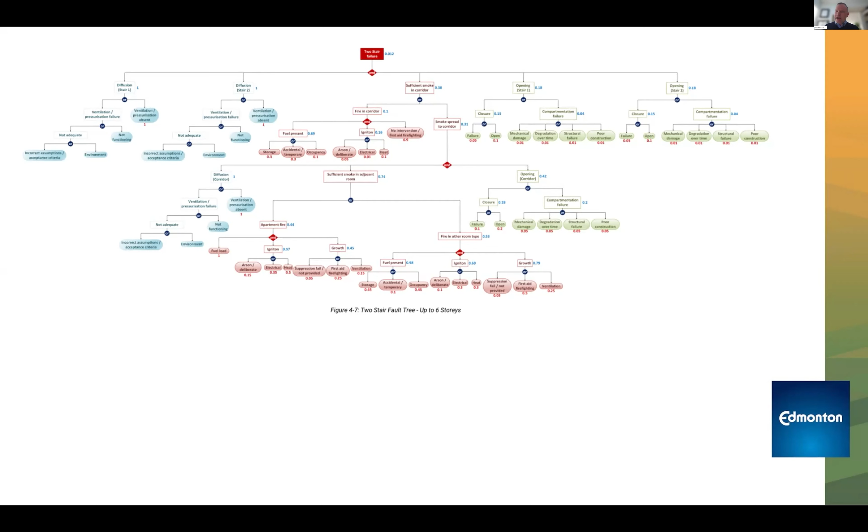One element that's really important to note - because there's been a lot of conversation with fire, both locally, nationally and internationally on this change to North American thinking around single egress stair buildings - is that we've also concurrently developed a guideline for the inclusion of the fire department in the review of all alternative solutions. This took the pressure off of this particular issue, because there had been a lot of focus on single stairs, but this is possibly one issue of many that comes about regularly with respect to how alternative solutions are reviewed by the city.

By the production of this guideline, we've been able to chart a clear path for all interested parties within the city who have a responsibility for keeping people safe, both from the code perspective and from the fire protection perspective.

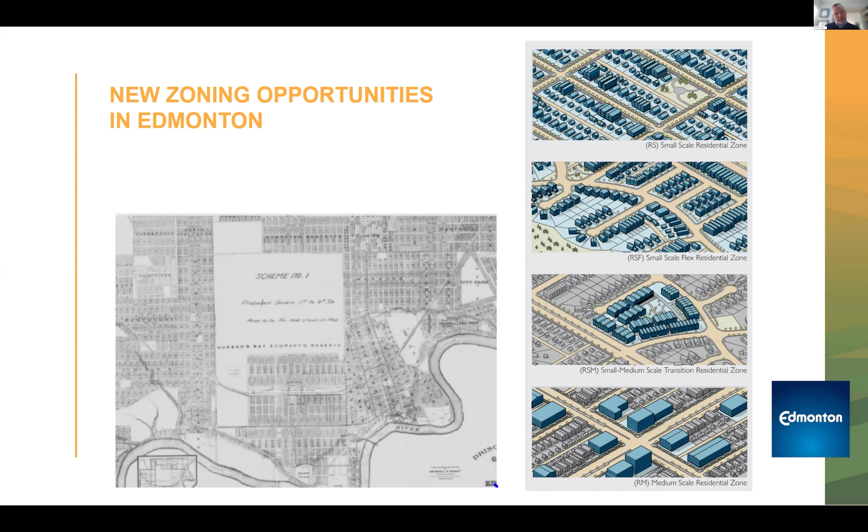Finally, I'm going to get into what's unique about Edmonton. We've had a major zoning renewal effort underway for the last few years, and as of last year we reduced the number of zones from 46 to 24 and diminished many of the exclusionary zoning practices. This is all in a bid to open up the city to new forms of development, particularly infill, and enable a lot more of that citizen-led development that Conrad spoke of at the very beginning.

So part of our guide has the technical analysis, the support of the alternative solution strategy, but also this design element. You'll see in the guide a review of common lot types within the city and the common zones therein, and a number of massing models relative to this single egress type that are available.

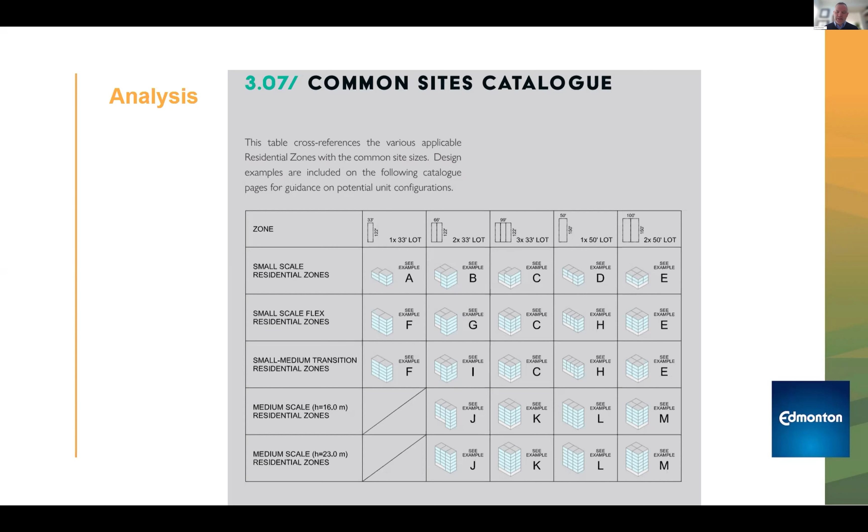Again, this is pointing the development community in the direction of what they could possibly do. Because let's face it, these buildings in Canada - though the alternative solution strategy is available to anyone today and has been for a number of years - it's not a common approach. It's risky for developers to hire those consultants to do that work, and it just simply hasn't been done very often. I think in the past 10 years we've had maybe 3 single egress buildings. It's just not part of the mindset of developers, and we want to showcase here what those opportunities are within the unique characteristics of Edmonton.

I won't get into the details of some of these options, but essentially Dub has created some quite interesting designs showing how they work within the city. So in total, there's the guideline. Happy to answer any questions, and thank you to LMDG, to Conrad, and CMHC for supporting this work. So thank you.

Thanks, Ian. I'm going to take it away here. Thanks to all the previous presenters. My name is Ryan Bruer.

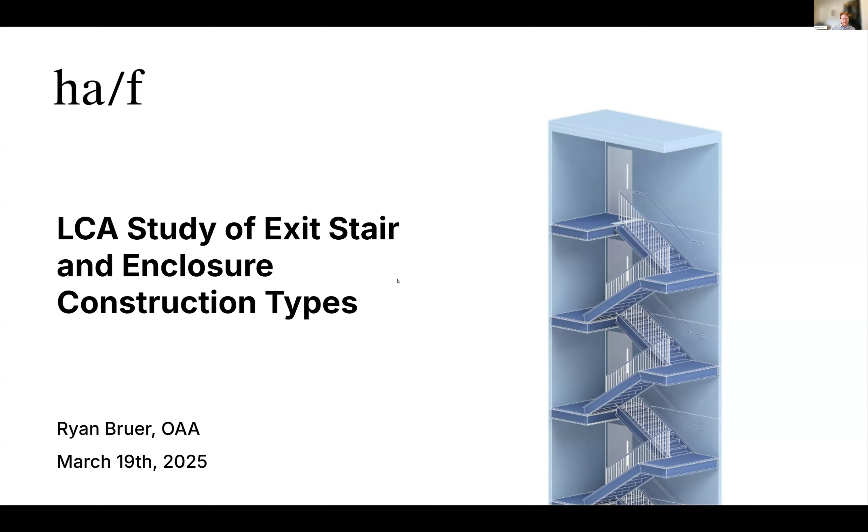I'm co-founder of Half Climate Design, and I have the pleasure of presenting our results on our study of exit stair and enclosure construction types through a life cycle assessment. Quick intro to Half: 3 years ago, we started Half to answer the question, how do we halve the embodied carbon of construction in Canada this decade? We've been doing this by partnering with policymakers and builders to assess whole life carbon and cost on projects.

So how heavy is an exit stair? The purpose of this report was to compare exit stair designs to understand how non-combustibility requirements, as well as fire resistance rating, could drive embodied carbon and cost through the selection of the system of the stair.

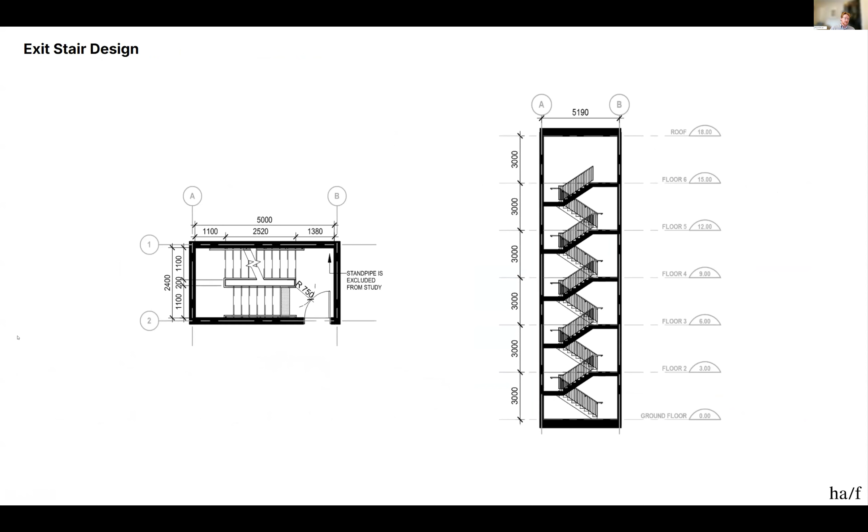In the study, we compared 6 different designs of 2-hour fire resistance rating and 3 additional designs with a 1-hour FRR, all with equivalent flame spread ratings on the interiors for each of the designs. The baseline design was a code-compliant exit stair for a 6-story residential building based on typical industry practice of construction, and the material quantities were gathered based on this baseline.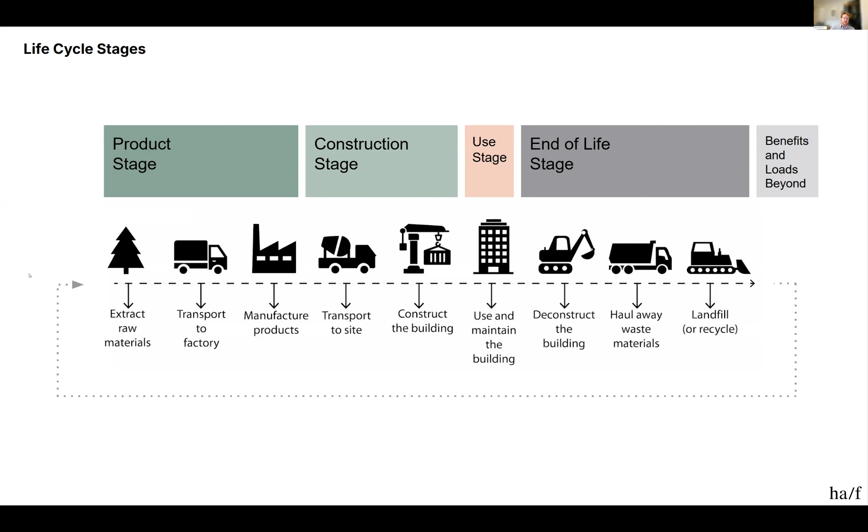Just as a quick review of LCA, life cycle assessment: we know all construction materials come from somewhere. So what an LCA does is quantify the environmental impacts of those materials within a building, from extraction all the way through until the building is no longer standing.

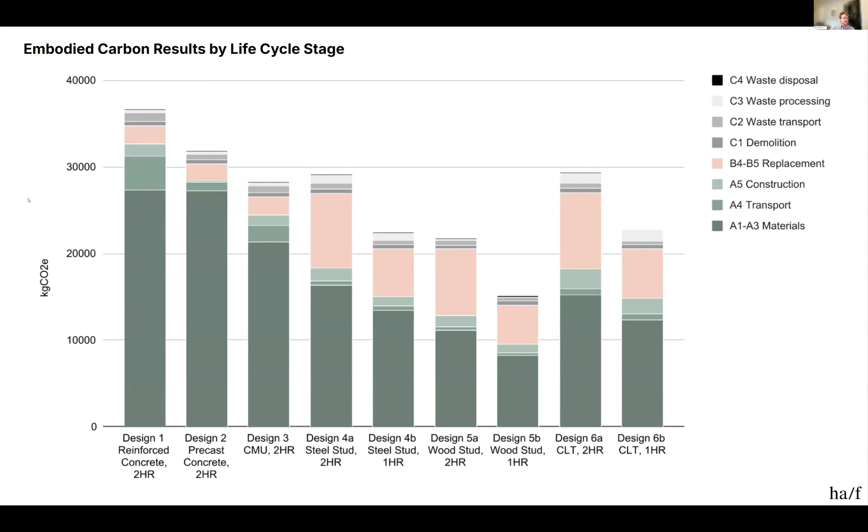So these were the results. They illustrate that an exit stair's construction type significantly contributes to a building's cost and carbon. We're going to look at the results in a few different ways as we go here.

First, I wanted to go quickly through each of the types. You'll see the design name, the fire resistance rating, the total embodied carbon, as well as the carbon storage through either carbonation or biogenic sequestration. This first design is the reinforced concrete at 36,591 kilograms of carbon dioxide equivalent, the standard for measuring global warming potential of greenhouse gases within a life cycle assessment. That's the metric you'll see on each of these designs.

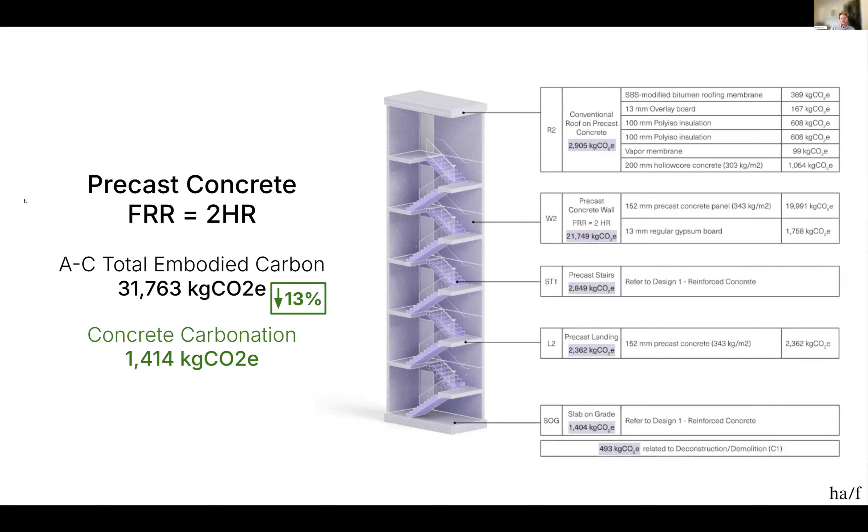If we go to the next design, the precast concrete design, there's actually a 13% reduction in embodied carbon for this design. It's based on a proprietary design from a local Ontario manufacturer. It achieves a thinner wall assembly, so less material means less carbon in this case. Likewise for the concrete masonry design, which was another 11% reduction in carbon.

The steel stud design shows a marginal difference from the CMU, a 3% increase. Compared to the 2-hour fire resistance rating, the 1-hour fire resistance rating for the steel stud shows a 22% reduction in embodied carbon. That's entirely driven by the change in wall assembly, from having two layers of Type X gypsum on both sides of the wall to a single layer. You'll see this change for each of the 1-hour systems assessed.

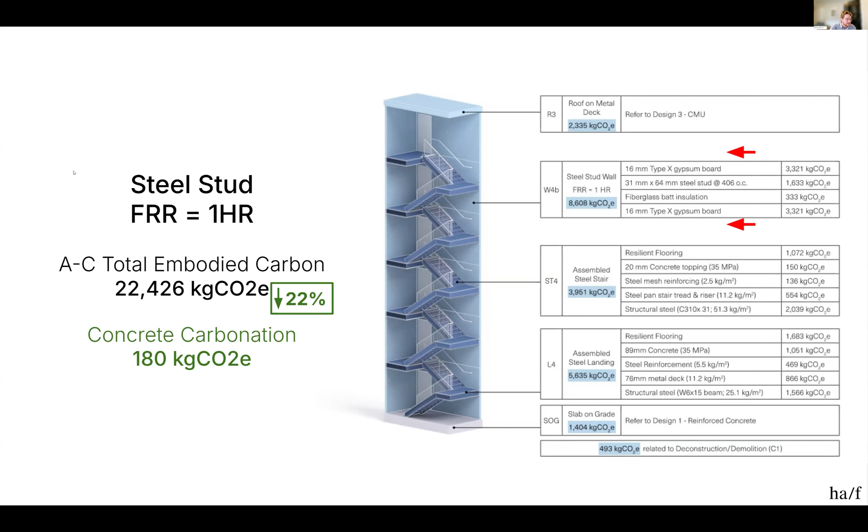The wood stud, 2-hour design, is very similar to the previous, but in this case, because we're now using more wood products, there's a more significant biogenic sequestration of carbon, nearly 1/3 of the embodied carbon. Then again, when we go to the 1-hour design, we see a dramatic reduction in embodied carbon.

The final design is the mass timber, shown here with the 2-hour fire resistance rating design. The mass timber design was much more than the wood stud, much closer to the total carbon emissions of the CMU design. But because the volume of wood product in this system is significant, the carbon storage is likewise much more significant. Then again, for the 1-hour, you see that reduction with the reduction of gypsum used.

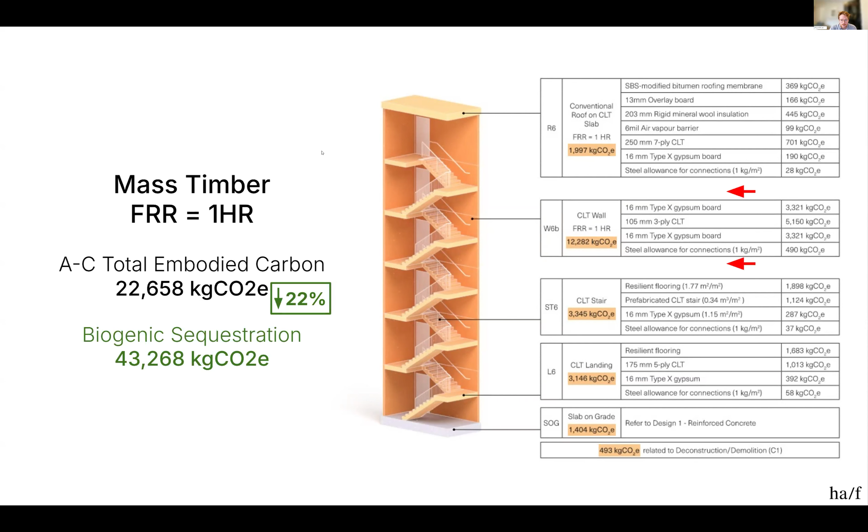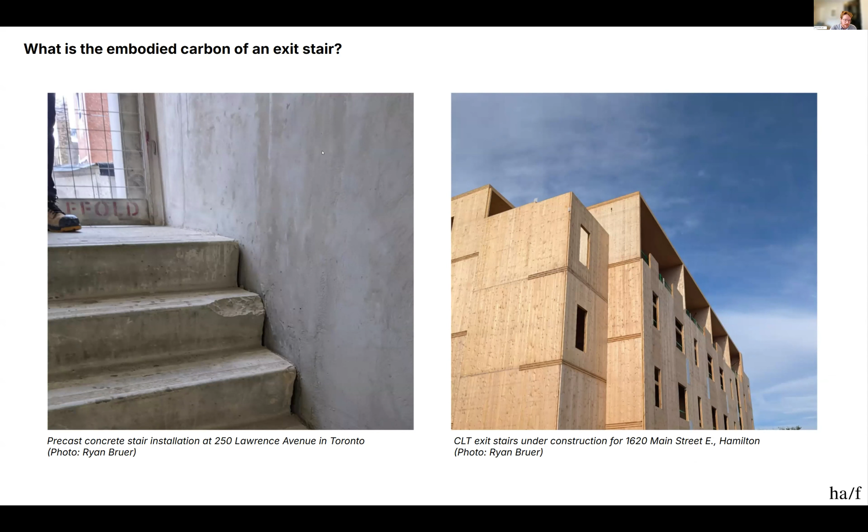So we're going to go on to what we learned from this, and it's really not about a choice or ranking between one or another. It's about finding an optimal solution for safety, cost, and climate for any given project and site.

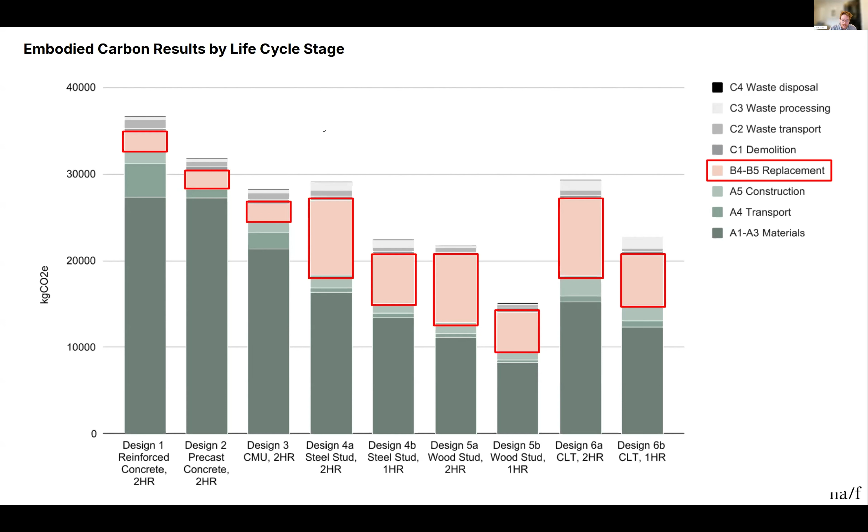A quick review of what we learned, with 3 findings I wanted to present today. The first was durability matters. Looking again at the totals shown by life cycle stage, I've highlighted in red the replacement stage emissions within each of the designs, and you'll see that some have considerably more proportionally than others — those are the designs that have more gypsum board than the others. In this set of materials, the gypsum board had a 40-year service life, so in a way it's a penalty on having less durable materials. This is something that, looking into the design further, we would aim to reduce.

And then finding 3, sufficiency is cheaper. We combined our life cycle assessment results with a cost estimate provided by Vermeulen's, the costing consultant, and there was a pretty remarkable correlation between the two. I think the most important takeaway here is that every exit stair in a building has a significant cost and carbon implication, no matter what the construction.

But even within each of these types, there are changes we can make to reduce carbon and cost. Within the concrete designs, CMU was the lowest carbon and cost option, and that feels right to us.

Thinking, what's the highest and best use of a material in a building? It's the question of sufficiency. What's the adequate amount of something to achieve the same results? So that's the goal we have, where in this case, less is less.

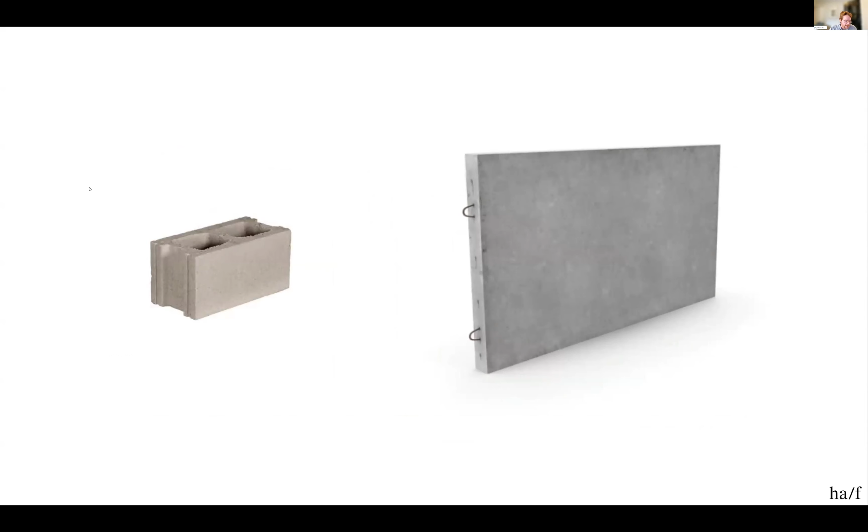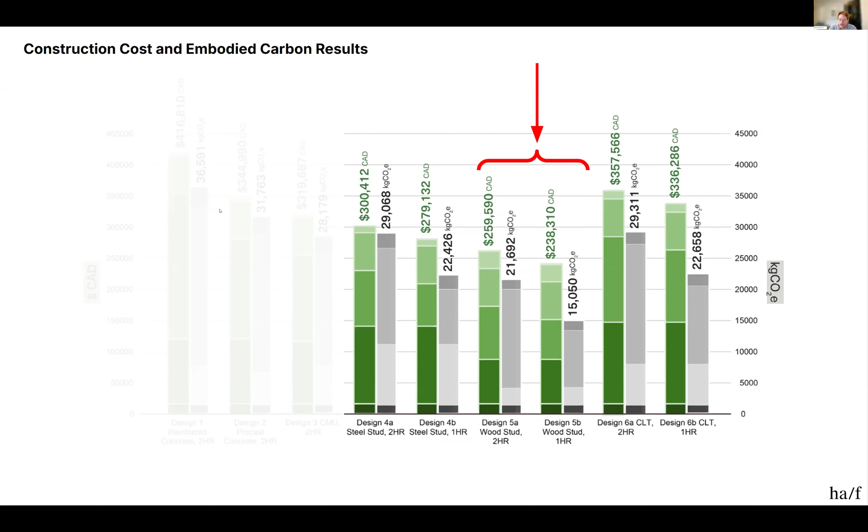And then this was also true for the lowest cost and carbon design, where the wood stud in both the 2-hour and the 1-hour options were the lowest. So if you were looking to halve your cost and carbon of an exit stair, this would be the one to choose. And then just thinking between these 2 wood systems, for certain types and heights, should we really be using the same system? So thinking about the different heights and different locations, whether it's in Toronto or Vancouver.

So, yeah, I think just in conclusion, this does reflect some of the work we've been doing with government agencies and with professional associations to really raise the bar on best practices for low carbon building design. We use this kind of inverted pyramid of carbon mitigation strategies often, and I think you'll see some of these designs and the choice between 2 of them really hitting on a few of these points.

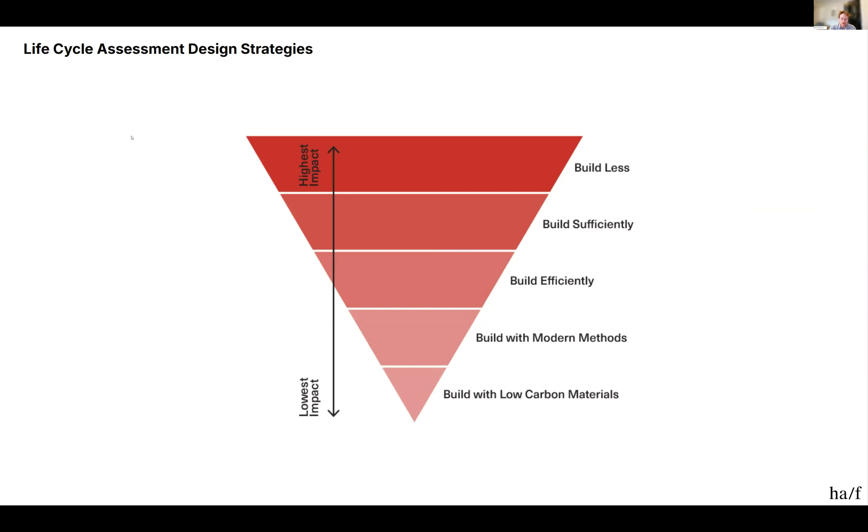So for all the details, please read the report. It's on our website at hafclimatedesign.com. It's also on the Single Stair website. Thank you for your time.